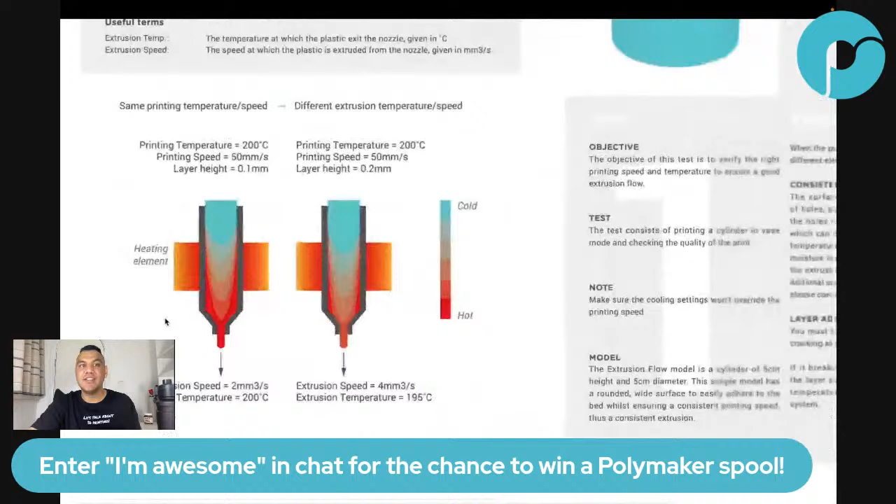This is - no, that's the - yeah, here. You see, there is a difference between printing temperature, which is defined as the heat block temperature, and the extrusion temperature, which is defined by the temperature of the filament coming out of the nozzle. And this is very important, and I wish people would use that vocabulary.

Why? Because sometimes to solve something, you have to increase the extrusion temperature. And yes, increasing the printing temperature can help, but there's many other things that can help - for example, lowering the speed. Lowering the speed will also increase the extrusion temperature. So there's a big difference between these two, and this is what he's saying. I really like that he said that, because it's very important, and not a lot of people do that.

Gonna have to rewatch this from the start. Now is Abdullah - yeah, is that confusing? I'm trying to dissect it properly. But I know you are in a wedding, right? So you have to listen to the bride at the same time as I'm talking, right?

Both curves will rise, so the gap will be smaller, blah blah blah. Sweetie HP, hello, what about heating?

The final thing you can do, which is the biggest thing, is to take this ambient temperature here and increase it, because that means the lower layer has less of a gap to close, and then this difference becomes smaller automatically. And you also start losing a lot less heat to the atmosphere because it's warmer. And the way you do this is by putting your printer inside an enclosure.

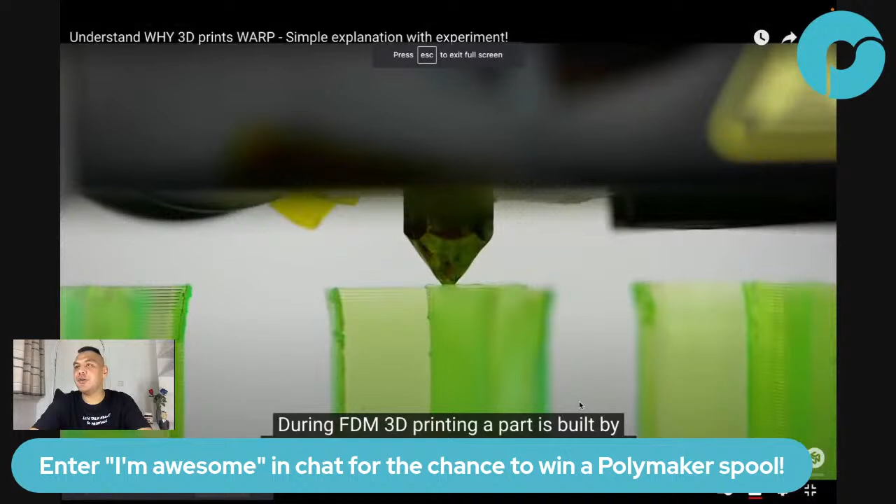Yeah, so I'm very happy that you are here, Igor. And if you're willing to do that, let's do it, let's do some tests, let's get things going about this theory.

Maybe he tested the shorts feature on YouTube because it's only 2 minutes. Yeah, I think that was way before that. But let's check Stefan's video - 'FDM 3D printing, a part is built by...'

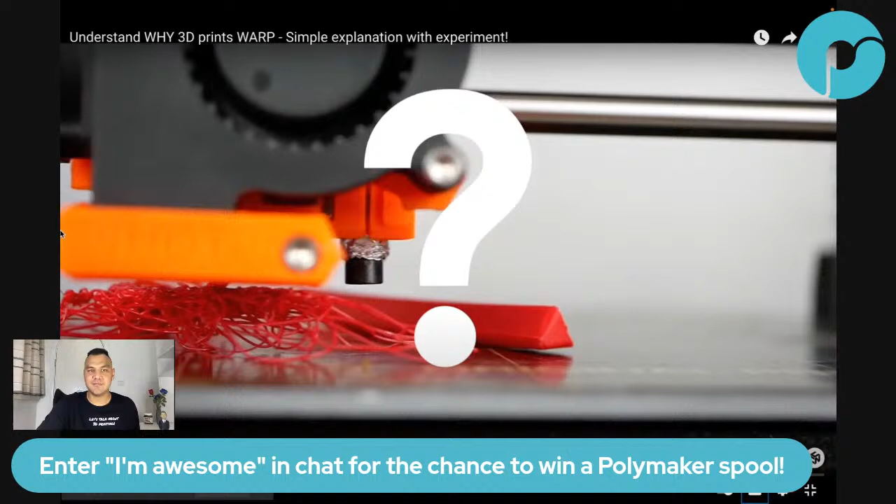Let me demonstrate this effect with a simple experiment. By the way, guys, I disagree with his explanation. I 100% agree with his demonstration. His demonstration is exactly what's happening. But his explanation is not what is happening, or at least in my opinion. When I saw this demonstration, I was like, whoa, that's the perfect way to show warping. But why are you saying this?

We all know that materials usually contract when they cool down. When I watched the video, I was shaking the tape and I was like, whoa, awesome. He's going to say it. He's going to challenge everyone. And then I hear, we all know that materials shrink when cooling down. And I was like, no.

Our 3D printing materials are mostly extruded at over 200 degrees Celsius and then cool down and solidify, which makes them shrink quite a bit. A piece of tape represents a layer that is printed. I simulate the material shrinkage by pre-stretching it and then sticking it to the table. Every subsequent layer will now pull on the lower layers. At some point, the connection to the table is not good enough anymore, and our simulated 3D printed part releases from the table and warps. There you have it. This is why 3D prints warp. How you can prevent this phenomenon is a topic for another video.

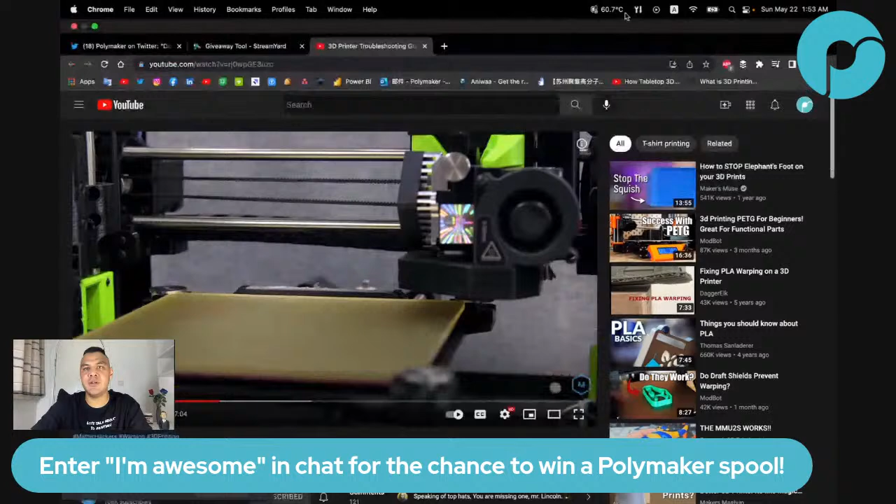Because I translated this from French, it should be viscoelasticity—something like this. Yeah, that's the one. Let me copy paste. Yeah, Santiago, that's the one. Sorry, my pronunciation is Frenchy, so sorry for that. Santiago, if you don't mind helping Joe if I miss some questions.

Thank you for helping. Proper Z offset. We're talking about warp just from filament squeezing out into itself. It's pushing that, can actually cause your first layer to warp just from the filament flaring out from the side. If your print is too low, it's going to cause warping, causing the filament to flare out from the sides.

This, I don't think so—we shouldn't mix up the warping definition. What he's talking about is over extrusion. If you're printing too close to the bed, you'll have over extrusion that goes to the side. But that has nothing to do with warping.

Squeezing out into itself, so it's pushing the previous pass up, which just reduces the layer adhesion in the beginning. And it's not pushing up, right? It's pushing sideways, but the accumulation is going to go up, right? Well, which is the same. Maybe I'm a little picky here, but it's not warping. I don't want people to think, oh, I'm printing too close, my part is warping. No—there's a sweet spot where your Z offset is at just the right height, where your part sticks well enough but it's not picking up.

You love the word viscoelasticity? Yeah, it makes it scientific.

Previous passes of extrusion. Now if you're printing with ABS or nylon specifically, those two are notoriously bad at warping—a lot more work, notoriously difficult to get printing, need a little bit of care to get them to work properly.

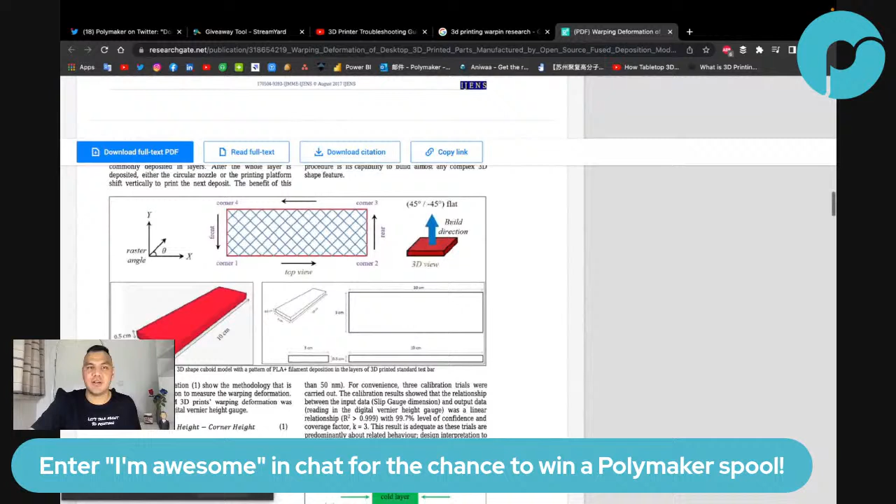Otherwise I look more crazy. But there is a paper that I think is this one—yeah, so look at this paper. I mean, you can read this paper, it doesn't explain, it just says exactly the same: when a material cools down, it shrinks, and then that's it. And then they do some kind of experiment.

But look at this—the hot layer expands, the cold layer shrinks. So they have a part that shrinks, that warps the other way. So even the research, they don't really—it's not because it's a research paper that it's going to be true, or that it's awesome just because it's a research paper. No, a research paper is meant to explain what they did and to draw the conclusion of what they did.

But that's your job to see if they explain well, if they ask the right question, if they test the right thing. That's your job. It's not that you receive that and that's it. That's the truth, right? So no, it doesn't work this way.

And if you go very quickly, then you will really realize that there's a lot of things that are missing. Let me share with you.

Interested in research in FDM? Yeah, I'm very interested, and we're actually doing our own research. There you go, I'm just sharing that, you can have a look. I didn't read it in very detail, I hate reading, but just in diagonal. By the way, that might be an explanation why I'm crazy, because I hate reading. So which means maybe I'm missing a lot.

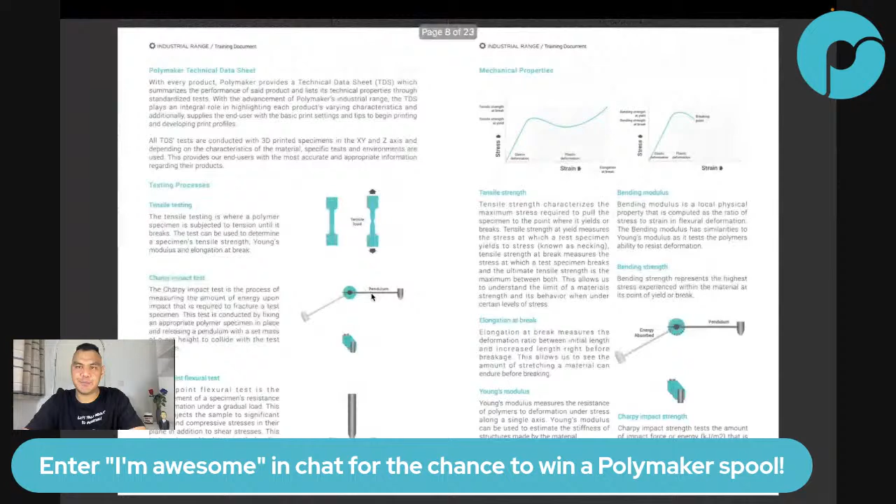But anyway, let me go into the explanation of what I think is warping. So I wrote this training document for the Polymaker people. There is a training process for all the Polymaker people, and that's how I explain all of this.

Okay guys, ready? It's happening. 3D Jeff, late? No, you're not late, you're exactly on time. You just missed the first part, the common knowledge, but now I'm into the big stuff, science is about to happen. I enjoyed the 2 hours. Oh, it's already 2 hours. Okay, great, you enjoy it. Ready everyone? I'm not ready, yes, waiting for it. 2 hours now, drop effect. Okay perfect, 2 hours later. You must use the discriminant to decide whether something is true or not. Discernment, whether you believe in it. Yes, I agree, signing off, have to go to bed. I don't know if it's the right time, Nathan, but have a good night.

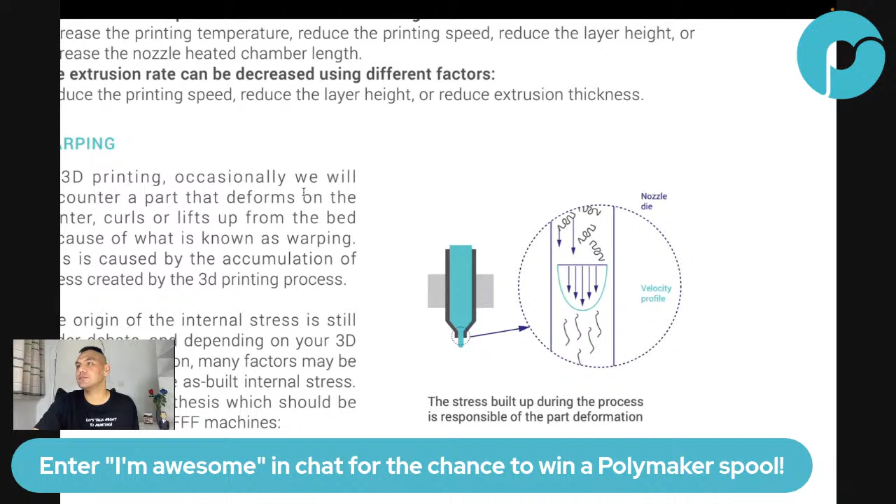Geoff Carroll, do you know about the contest? It's going to be basically the chapter from the book. Super slow, yes, if you already read the chapter there will be maybe a little bit more details, but that's basically it. Glad that you read the chapter. Let me know what you think.

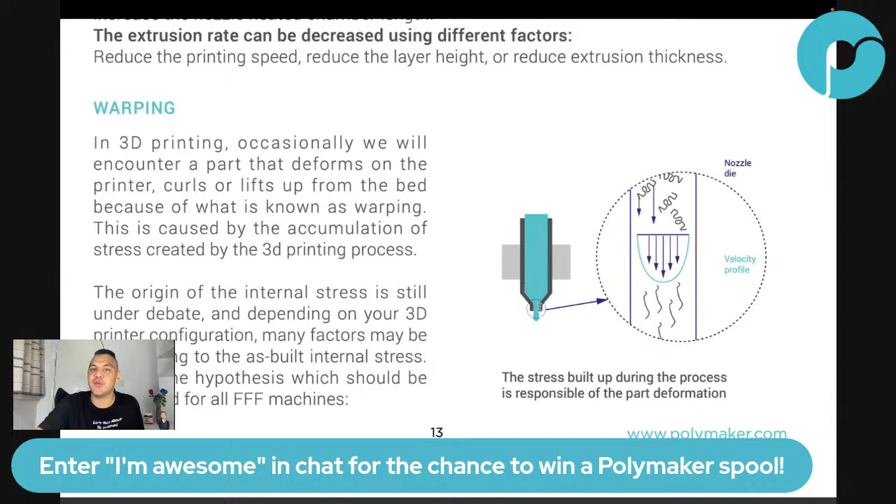So, in my opinion, the stress is actually coming from the viscoelasticity behavior of the polymer. What does that mean? It means that when you are pushing the filament through the die, you are forcing the material through it. It's like a rubber ball, the kind you throw and it bounces. You take that rubber ball and push it through a very small die. What happens after it goes out? In the die it's going to squish, and when it exits, boom, it gets back to its shape. So in polymers, the polymers are like spaghettis, and when you force them through the nozzle, they get stretched. Then you stick that to the layer below it, and that's where the stress comes from. It's exactly like the CNC Kitchen test: you have a tape, you stretch it, stick it somewhere, then you have another tape, stretch it, and put it somewhere. So the fact that the polymer is in a stretched state, it will want to go back to equilibrium, and that's where the stress comes from. So it has nothing to do with high temperature and then cooling down and the coefficient of thermal expansion.

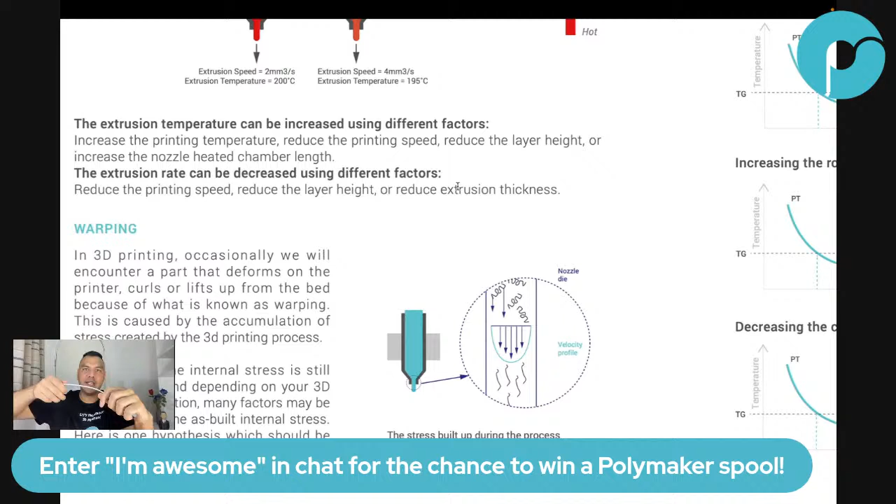I'll give you an example. If you have a rubber band, you stretch it, put it in water, and freeze the water, that's exactly what's happening. You are taking the polymer, and the polymer cools down, so it's frozen and cannot go back. And that's the stress. There's a lot of stress.

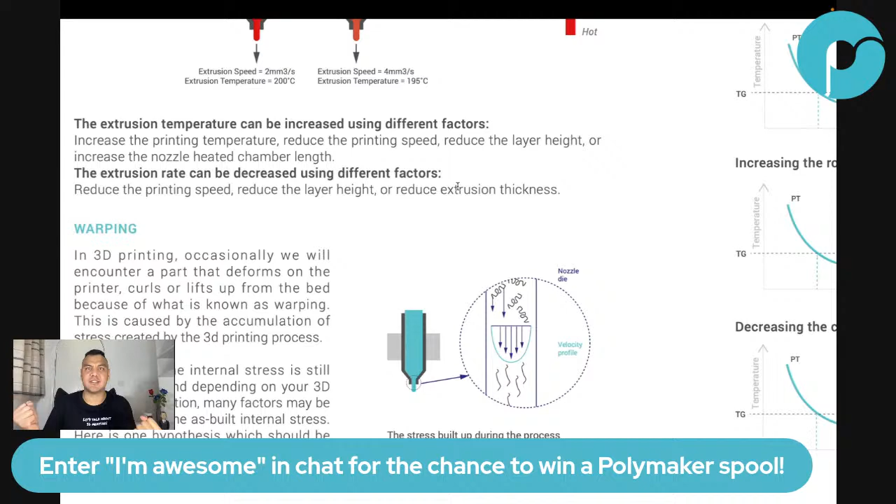Pallets like, okay, so the question I had, because I was saying the nozzle is stretching the filament. It's not enough for me. Why is the nozzle stretching the filament? I mean, it's a hole. If I have a ball like this and I'm putting it through the hole, it's still a ball. How come it's stretching the filament?

You need to challenge your own theory. And I was thinking, how in the world is the filament stretched by the nozzle? Okay, here's my explanation.

So it is really a combination of heat and extrusion. Is it both? In my opinion, the heat is negligible. The viscoelasticity behavior of the polymer is the major thing happening, in my thinking. I think the cooling is negligible compared to this.

So okay, here's the thing. Why? And you should ask me. It's like I demonstrated. Okay, experiment: I have a ball of filament. I put it through a hole. It's still a ball. Nicholas, why? Explain to me why the polymer would stretch.

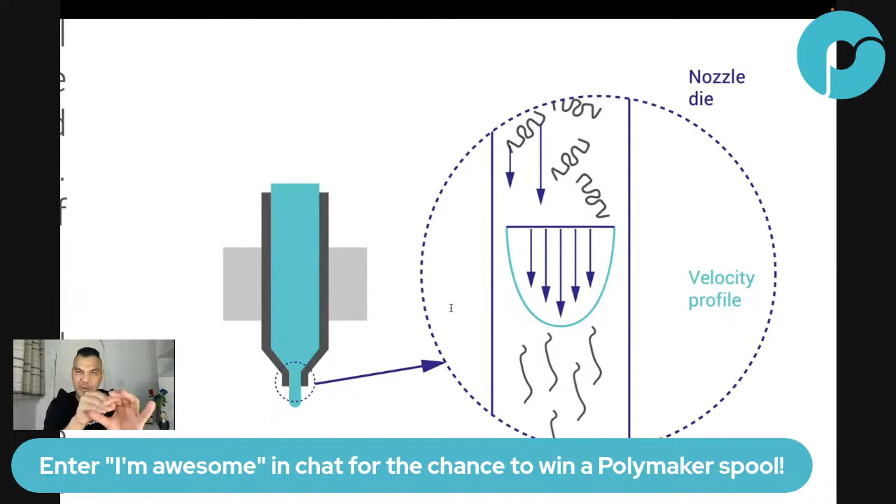When you have a flow of material or liquid or fluid through a pipe, you are going to create a velocity curve in that pipe, right? A velocity curve means the particles in the middle will go faster than the ones on the edge. The reason is the one on the edge has more interaction with the edge, so it will slow them down. And this one has interaction with this one, etc. So theoretically, the one at the edge is almost stopped, a very, very small layer that is completely stopped. And then you start to go faster and faster the closer you go to the middle, right?

So now think about it. If you have a wood stick or whatever in a flow, but the flow is going faster here than here, then it will slowly... let me start here. If here it goes faster than here, then it will slowly align, right? It will stretch itself. This one doesn't want to go as fast, this one wants to go fast, and then it stretches. Does that make sense?

Is it only me or is the stream breaking and buffering a lot? Maybe it's you, Abdullah, because usually when I have a problem, it shows me. But there's no problem here, so maybe it's on your side. If there's a problem on my side, it will show.

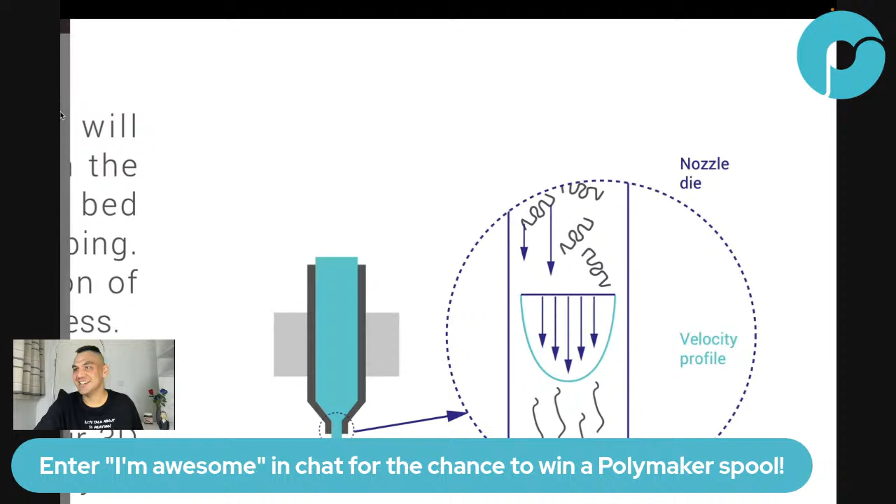Oh, I'm sweating so much. Actually it's getting hot here. It's getting hot, but I'm getting so excited. You guys cannot imagine how passionate I am about 3D printing topics. Definitely, if I understand anything, I will buy the most pricey filament in Polymaker. Well, hopefully you will. I think he's actually onto something.

Okay, so if there's no other question about why the filament is being stretched - how are you connecting the velocity of the polymer, the speed, to the stretch?

So the polymer is a long chain, right? This long chain will be somewhere in the flow, and each part of the chain will go at a different speed. The fact that you have a velocity curve means you will automatically align all the polymer, because one part will go faster than the other, and at the end of the day they will all align. I don't know if that was the question, but hopefully that answered it.

Polymaker, where are you at? Shanghai, China. It's 11 past 2 a.m. Getting hot, so you don't warp. Yeah, I'm definitely in a heated chamber, so I'm not going to warp.

Would it also be true that the more liquefied and hotter the filament is as it passes through the nozzle, the less likely it is to warp? That is a bit counterintuitive, but that is correct. So why?

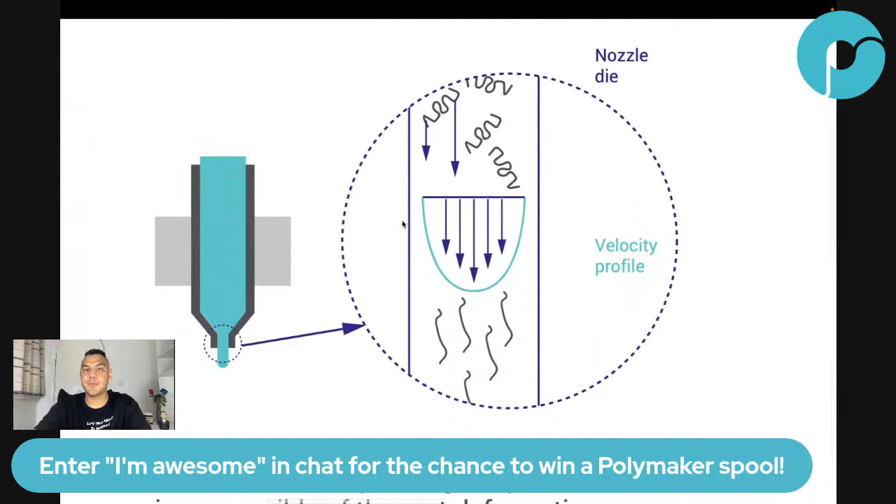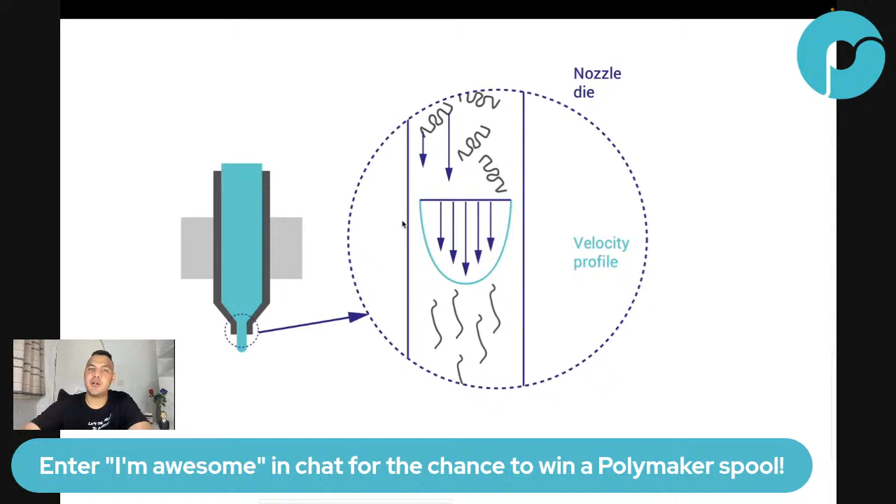How can you make sure the polymer doesn't stretch? Well, you have to flatten that velocity curve, right? Recently with COVID and stuff, we've become very good at flattening the curve. So what are the different ways of flattening this curve? Way number one: you can have a very low viscosity material go through. If it's very low viscosity, then the curve is going to flatten, because there won't be much speed variation in the polymer.

You can think about it this way: if you put honey through the nozzle, the middle is going to go fast, because the edge transfers the slow speed to the middle very easily with honey, since it has very high viscosity. But if it's water, even if the edge is very slow, it has high difficulty transferring that brake to the middle. You get what I mean? So you have a more homogeneous speed, and if you have homogeneous speed, you're less likely to stretch that polymer - at least in that theory. Yes, the speed-to-stress relationship.

A heated chamber gives the extruded polymer time to slowly release the stress before it solidifies. Yeah, we're coming to that. Oh, I think I'm understanding what you're saying now. Okay, great.

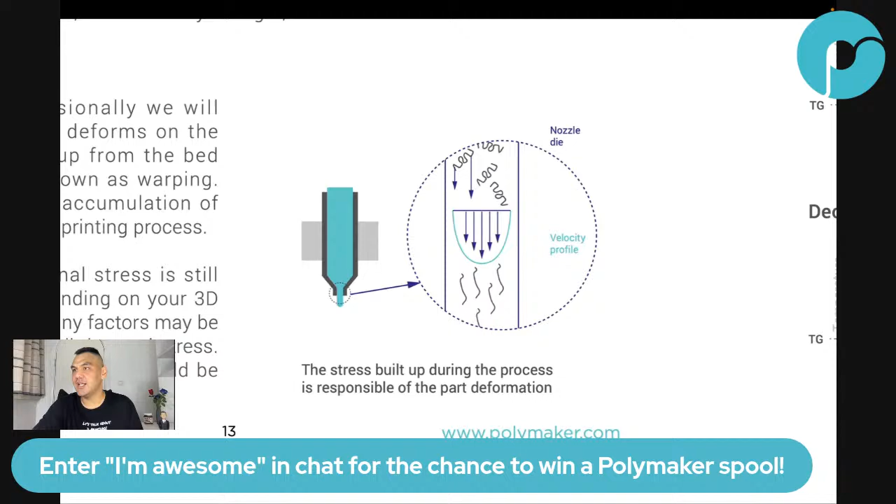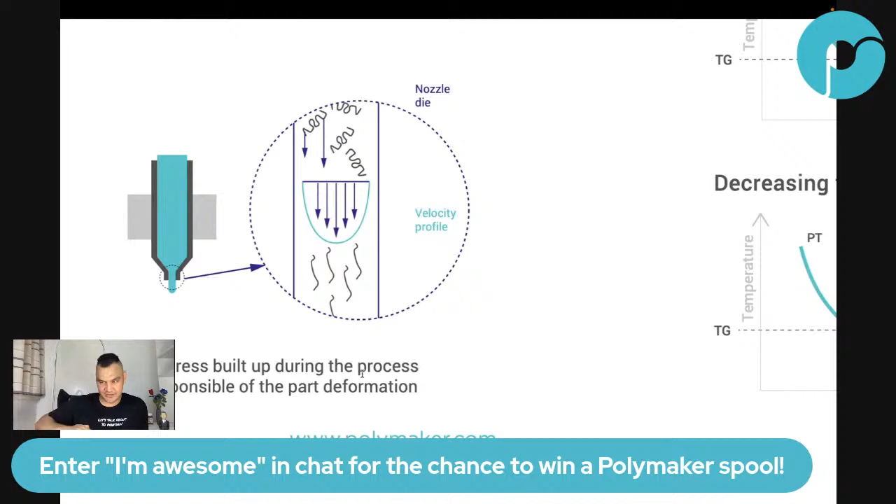Okay, so if it's clear for everyone, what's happening after that? After that, it's laminar because it's round, consistent. Maybe, I mean, I don't like to talk so much about things I don't have experience nor theoretical knowledge on. I have my academic background, I'm from software engineering, so my mechanical and physics classes were very low level.

Okay, so what's happening now? You are printing your part with stress. Right after you extrude, you have this stretched polymer, right? Well, the polymer will try to release the stress and start to come back, but it can only do that if it can flow, right?

So to test this theoretically, a thicker nozzle and thicker layers should warp less. A thicker nozzle, I'm not saying it should warp less, I'm saying it will have less stress, but you have to have the whole picture. There might be other parts of the picture that need to be taken into consideration. But yes, what I'm saying is a bigger nozzle will induce less stress in the polymer. Thicker layer should warp less.

No, thicker layer in that particular case means you are going to extrude faster, so the velocity curve is going to be sharper because of the shear stress you're creating, right? So thicker nozzle, yes. Thicker layer, currently in our current explanation, no, it doesn't make sense for this one.

Later on, yes. Polymer melts have a high kinematic viscosity, so you need very high speed to achieve turbulent flow. Maybe. So, dropping that effect, you are confirming that it is indeed a laminar flow inside the nozzle. Okay, thank you for confirming.

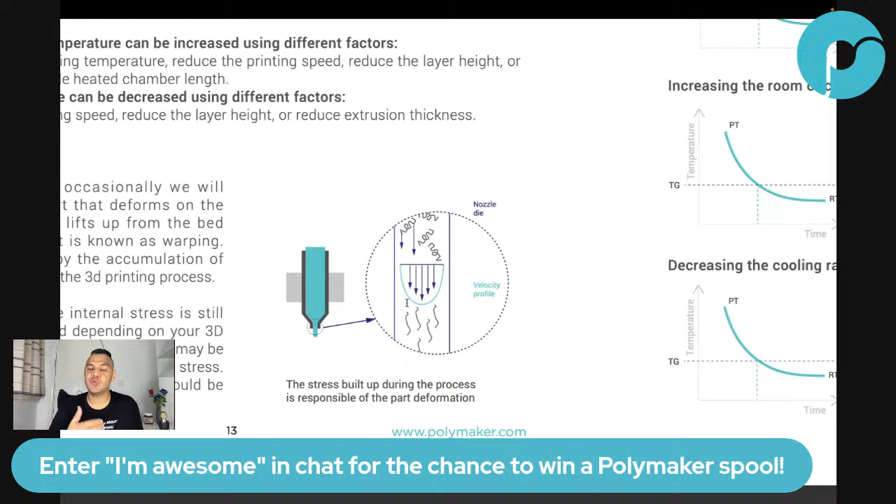Oh, okay, yeah, bigger nozzle, yes, and slower speed, yes. Definitely. And higher temperature so that your viscosity is even lower. So all of this, in my explanation, should reduce stress. I'm not talking about warping yet, we still have some other things to talk about, but yes, it will reduce stress.

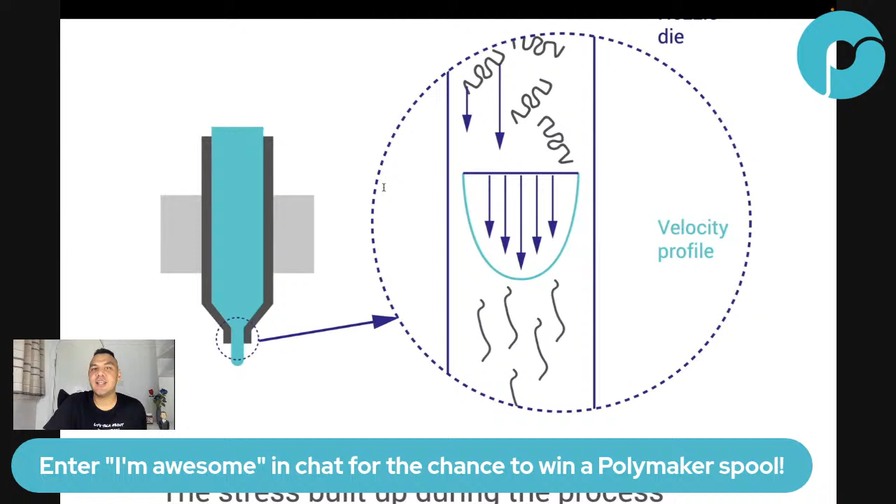Sorry, I don't understand - it's a hypothesis, still needs to be tested. A theory means it's been tested. Well, we tested it. Now either you believe it and that's it, or you test it yourself, and my suggestion is that you test it. So if you want, call it a hypothesis for you; for me, it's a theory, for me it's true - everything I've done goes into that logic. There won't be anything that confirms it 100% except looking at everything under a microscope. You can only do a bunch of tests that go in that direction. If you think a theory is something that's 100% confirmed, it's never going to be a theory, because material science for polymers is at the very beginning.

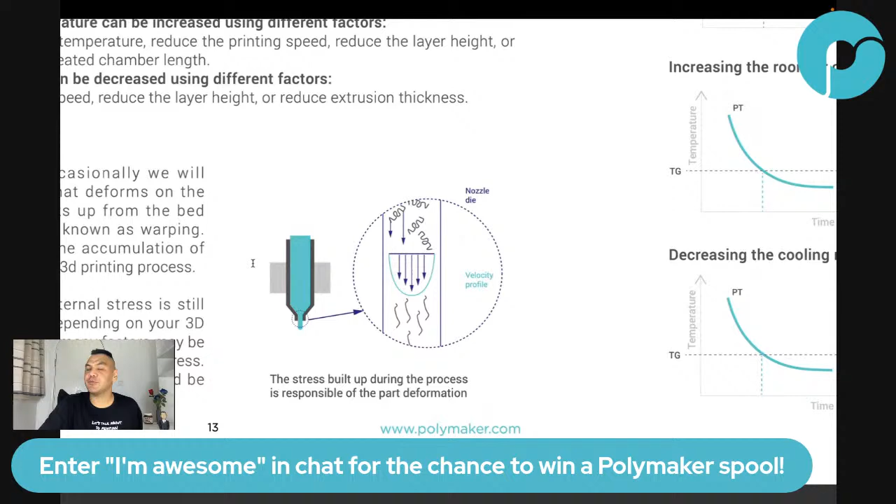So exactly, we all need to test it. I'm trying to determine what the test should be. Let me continue and then you can think about some tests - there are already a lot of ideas. What I'm saying is all of this should reduce stress. Now we need to think about which factor is bigger than the other. Is a bigger nozzle going to reduce stress more than just printing at a higher temperature? Will coating the nozzle inside be better than using a bigger nozzle? You get what I mean?

Sorry, comment with link is not appearing. Search for the video - Prusa should make this innovation because nobody else really can. Flat filament, not round.

Is he talking about warping inside, or just presenting an idea of flat filament? Micro Swiss markets some steel nozzles with a low friction coating. Yes, maybe you can try this - try one with low friction coating and one with a regular one and see how it does.

Some people think you can print ABS in open air, but you'll have layer separation and lifting. So I only print ABS in a pre-warmed enclosure, but rarely print ABS anymore.

Would a bigger nozzle cause a vacuum effect? A vacuum effect with a bigger nozzle? Sorry, I don't understand.

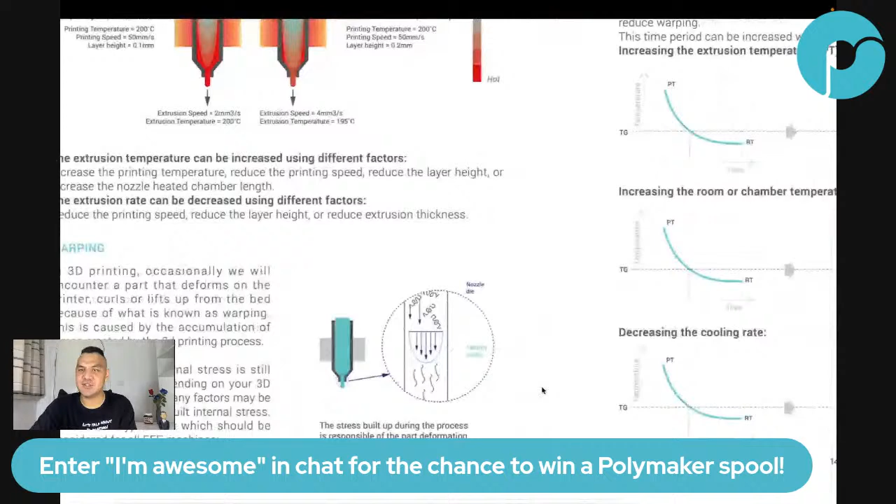Okay, so after it's printed, your goal is to release that stress, right? Because let's say you print, and then cool down very quickly - then basically 100% of the stress is going to stay in the filament, because the only way it can release the stress is if the filament is above TG, above the glass transition temperature, because that's where the filament can flow, where it has enough energy and vibration. Above TG is the temperature at which it has enough energy to flow, to move, without affecting the macroscopic shape.

So as long as it's above TG, it will slowly come back. As soon as it goes below TG, it will freeze completely. Okay, it will still move very, very slowly, but that's different. That's a different thing. Do you get it?

So that means if you print ABS and use the cooling fan to cool it very quickly, all the stress is going to be included inside, and then all the layers are going to be pushing—first layer pushing the second layer, third layer, etc. We all agree the accumulation will make it warp. We can go more into detail on why these shrinkages accumulate and why they go into corners or specific parts, but maybe we can do that later, otherwise it's going to be like a 12 hour video about warping. But that's one thing you need to have.

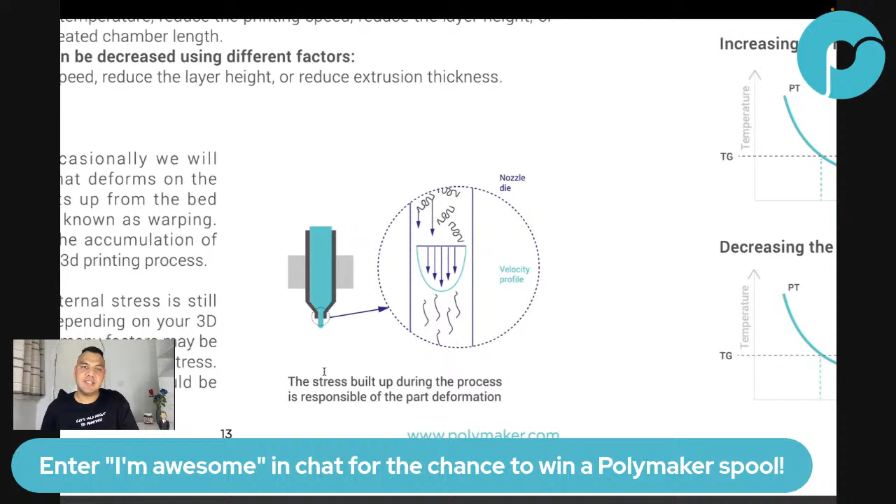Does this mean shorter polymer chains warp less? I've never thought about this, but let me think. Shorter polymer chain... yeah, I don't know. Maybe, I would need to think about this more.

Inside the nozzle there is higher pressure, that's why filament comes out. Think about a bottle of water—if you have a bigger hole, you will have water flow down and get sucked up because of the air. Yeah, you don't have this problem because it's pressure based, it only goes one way. It's not like a bottle.

Okay, so now you understand. What do you need to do to prevent warping? Release that stress. Release that stress.

How to release that stress? Having the filament above TG, having the layer or the part that you printed above TG for as long as it is necessary for the whole stress to release. That's very, very important. That's the fundamental of the second part, which is how are you going to solve warping? How do you solve warping? You make sure the polymer releases the stress before it goes below TG. Is that understood? Because the whole thing after that is this.

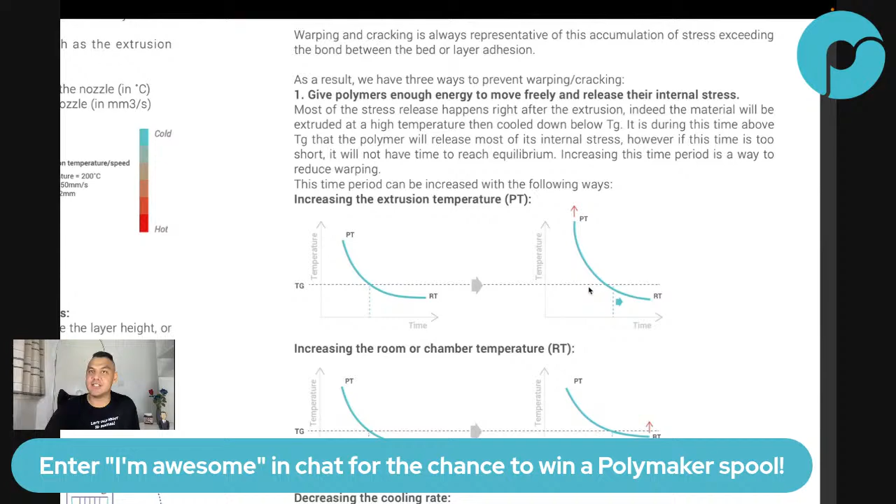How can we get the polymer above TG for as long as we can? The whole thing after is about this.

In 3D printing it looks like Teflon starts to break down, blah blah blah. A bot storm just hit there.

Oh sorry, Builder's Mark asked: How does the stress release? What do you mean, how? It's like a rubber band—if you stretch the rubber band, then it's coming back, because it's a stress state.

It's like a ball inside a curve, right? If you put the ball here, you stress it, then it will automatically come back—it will come back here. So the polymer is stretched, and then it comes back, because it can move, it's above TG, so it goes back to equilibrium.

Does that answer the question? Is there a few of you that can confirm so far you're still with me? Above TG the polymer can still move. Yes, it can also move below TG, but with a different behavior. Okay, you're still following me.

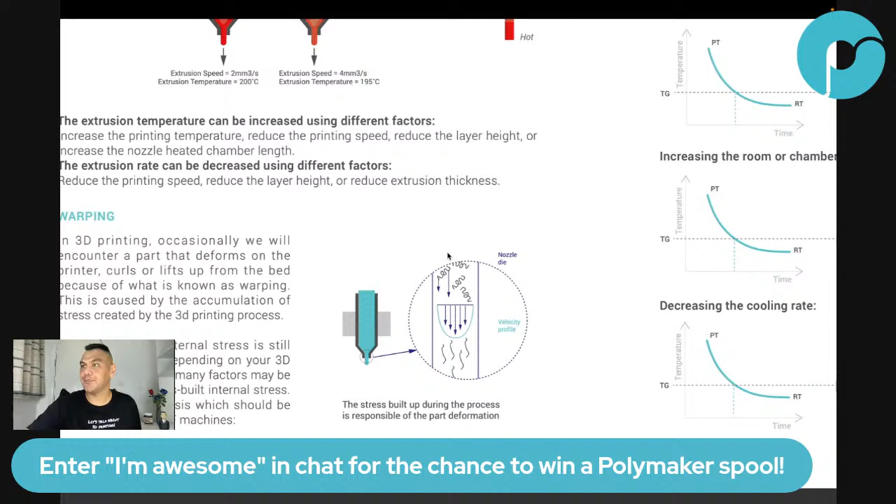Oh, we have 61 people. Amazing, 61 people discovering a new way of seeing warping by cooling down and hardening.

No, so simply speaking—when it's cooled down, then it cannot move anymore, and that's the problem because it will induce the stress.

We are a bad class. No, you're a pretty good one. I'm so happy that people are willing to listen to a different theory or hypothesis. I'm very, very happy, because honestly we were around 50 people at the beginning, and I was thinking after I talk about this everyone would be like, don't want to hear about this, I just want to talk about how to solve my warping, I don't care about where warping comes from. But we still have 60 people. This is just amazing, and you guys are very active, asking questions, challenging—that's amazing.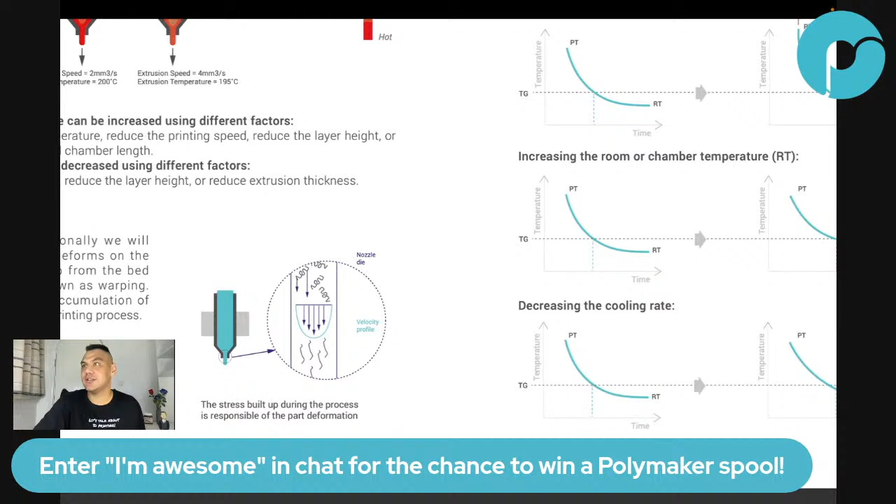Okay, so let's continue then. How to keep that filament that you extruded above TG.

Man, I really hope this is available for rewatching. Are you recording this? Releasing it in a slightly edited form and multi-part series would be great. Yeah, sorry, super slow, so it's recording, yes. Hopefully it will be rewatched, but I don't think I will have time to edit.

I mean, I'm a business manager at Polymaker. I'm not doing this because... that's my duty. I have a theory that I think is right, and I think it's right to say it out loud. I'm not in my working hours here, it's literally the night.

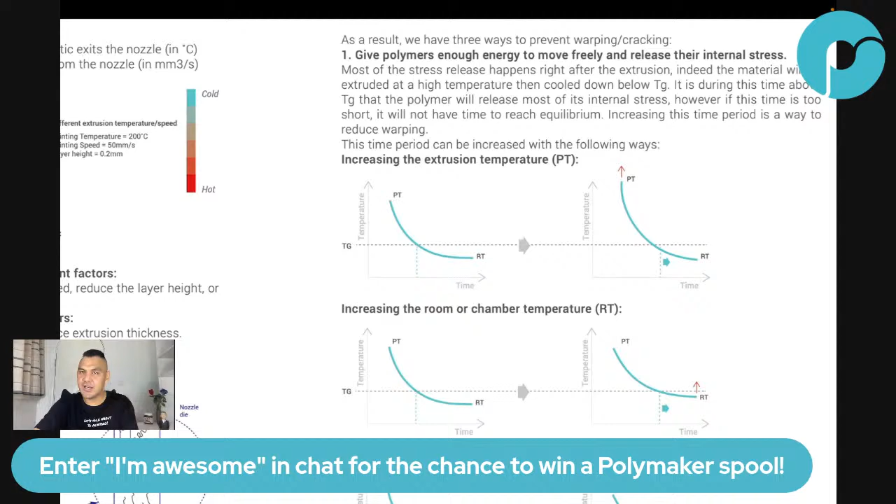So solving the issue, we want to release the rubber band stress. To be honest, right now you can already solve it. As long as you know what's happening, you know you have to release that stress. You know you have to maintain the filament above TG to release that stress. Then that's it.

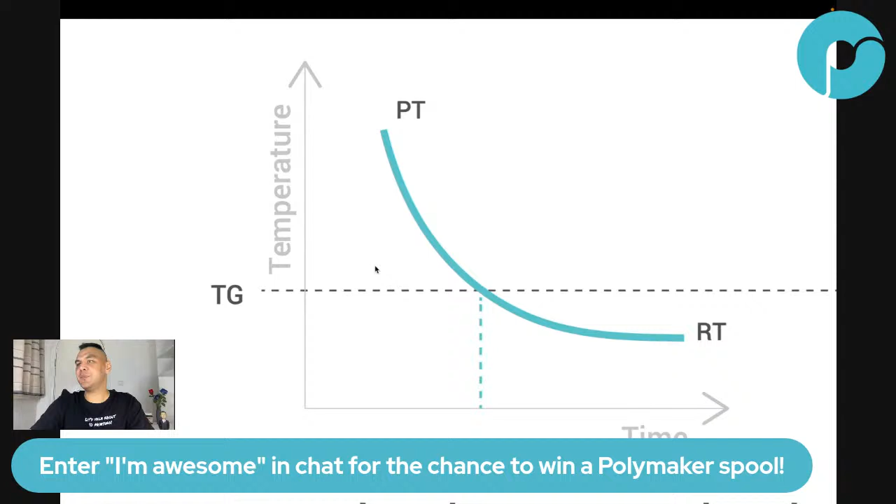Okay, so this is this - you have the TG that is here, right? So the time you have here, from here to here, you can see my mouse, right? So this is the time that we're looking at - relaxation time. So this time, we need it to be long enough for the polymer to release the stress.

So the question you are going to ask me is, how long? How long do I need? Do I need 1 second, 1 microsecond, 1 femtosecond? Do I need 1 minute?

So this question, unfortunately, I don't have a clear answer to. I do have some data that I cannot completely share at the moment, but let's say maybe it would be around... I have no idea, but it's not like 1 minute. Maybe 0.4 seconds, 0.3 seconds or something like this. I don't want to say the wrong thing, but that's the time.

If your part, let's go like this. If your part is warping, then allow it more time. And if your part is not warping, it means there is enough time, okay?

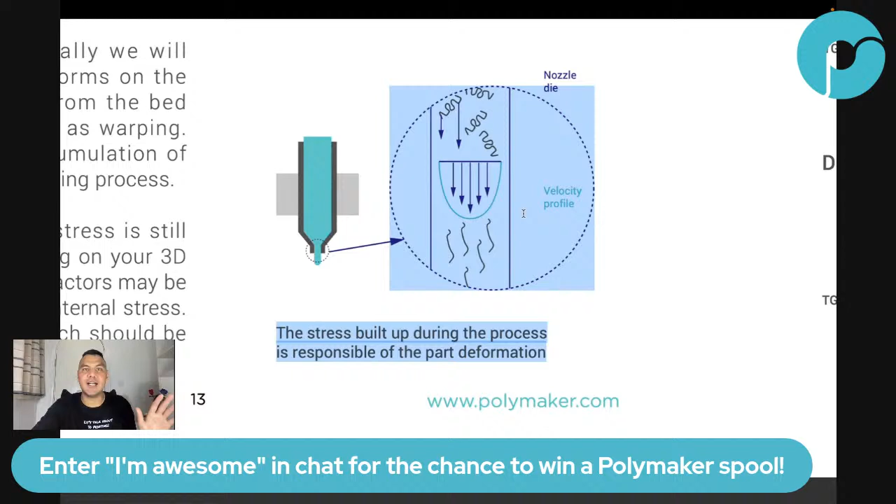Sorry, every time I'm looking at the chat when I'm talking, but I should look at the camera. So before, all the solutions we had were about not stressing the polymer, or stressing it the minimum possible. Now, the solution we're talking about is: okay, we have that stress, we minimize it as much as we can with some solution. Now, that stress that is left, how can I get rid of it?

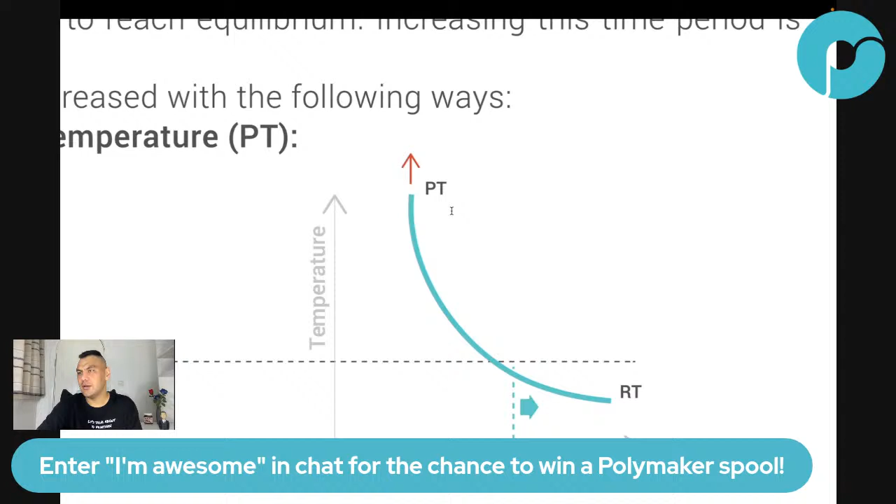So printing faster should make it warp less in theory. Why? Printing faster... yeah, you should give me a little bit of connection, right? At least connect it to how it allows the filament to stay above TG for longer.

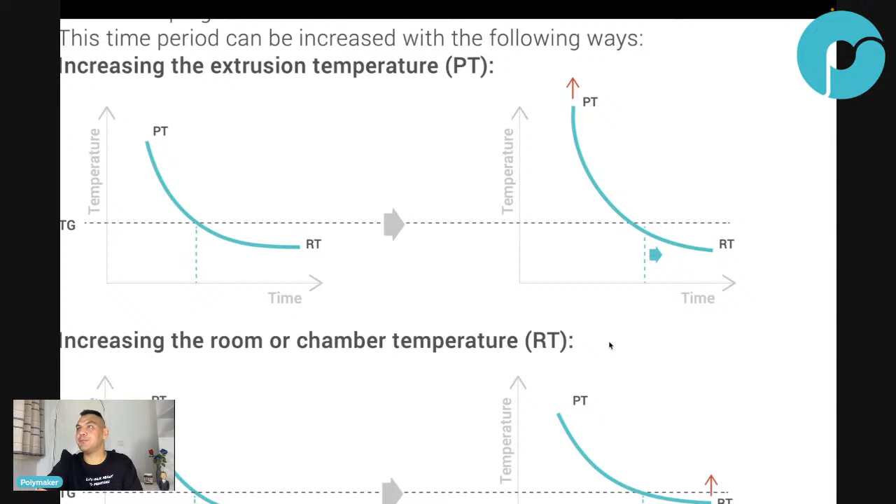My theory around warping. Printing slower would mean more consistent temperature. Yeah, so if you guys have some solution, try to link it so that I can understand. If you ask me, then give me your logic. You know, now we are trying to increase the time at which the filament stays above TG, right? So if printing faster helps with that, then yes, it will. But just give me the connection point.

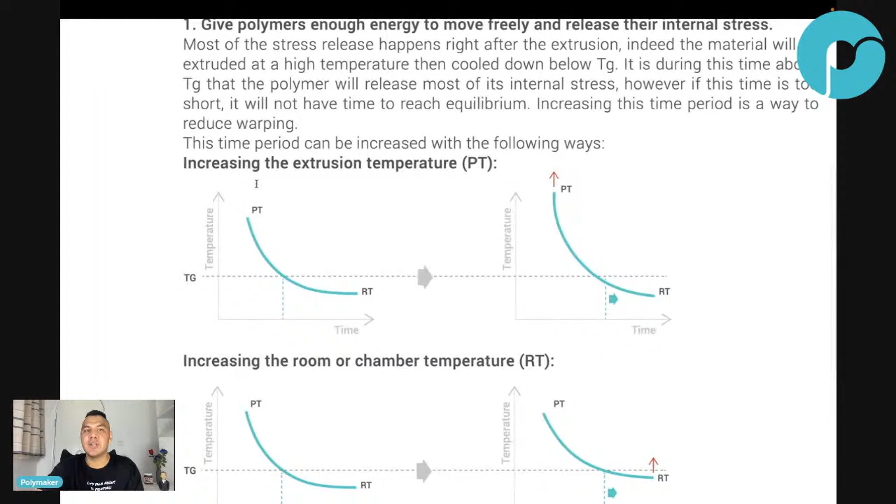So the next one is room temperature. If you increase the room temperature from here to here, then you will also increase the time. If you decrease the cooling rate, which means you don't use a fan, it's the same, you increase the time. So whatever you do, increase the printing temperature, increase the room temperature, decrease the cooling rate, you are increasing the time at which the polymer stays above TG, which means you are preventing stress from accumulating, which means you are solving your warping issue.

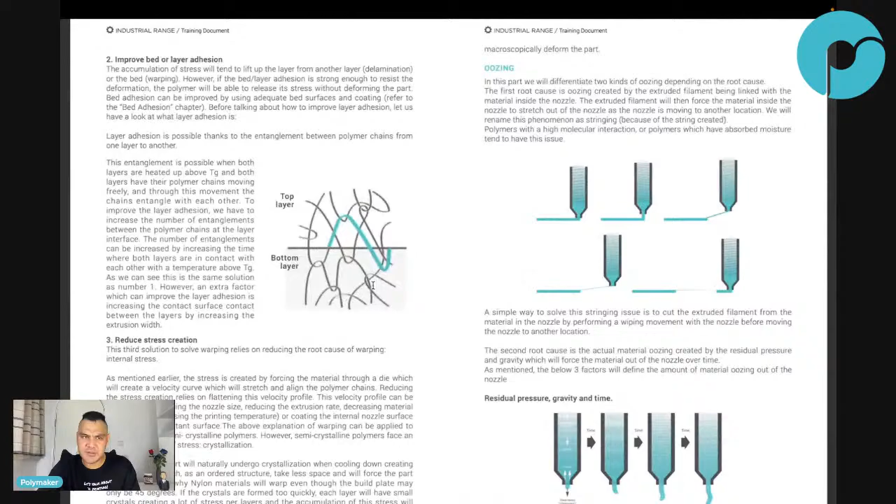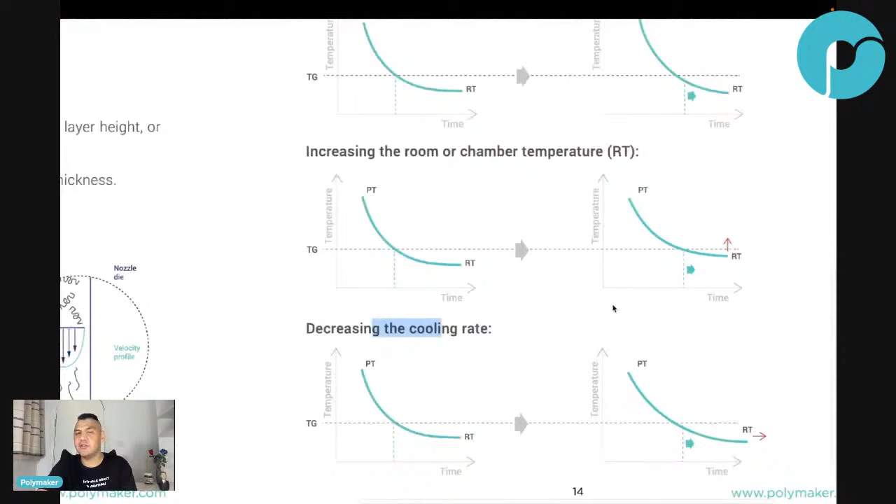Yeah, all of this is about some other topic. By the way, if you guys like this kind of going deep into what's happening, I do have some other stuff about oozing, like exactly what's oozing, what's stringing, what's the difference between oozing and stringing, how does that happen, what forces are involved, how can you solve this scientifically, same for layer adhesion, blah blah blah. So if you are interested in this, let me know. I can do this every day. So far so good, right?

Faster printing will put more heat into the part, not letting the stress area drop to ambient as quickly, letting the part stress easier. But not really, because if what you mean is you print faster, right, it puts more heat in the part -- why would printing faster put more heat in the part? Why not letting the stress area drop to ambient temperature as quickly? I don't understand, I don't think it makes sense to me, or at least the way it's explained.

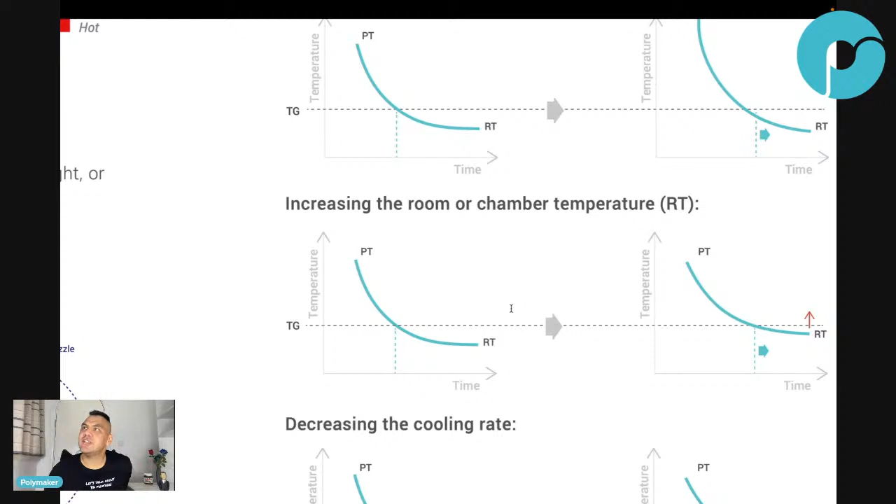I mean, I know how frustrating it is to explain something by message, right? It's easier vocally, but as it is explained, no, I don't think so, or I still cannot make the link. Yeah, I was thinking that you need to print faster to get more heat, but I still am stuck in understanding how the rubber band is able to release at higher temperature.

Oh, okay, I think I get you. So what you're saying is you want to understand exactly why when you have a rubber band, you stretch it like this and then it comes back. So that's what you want to understand. Why a rubber band, if you stretch, comes back.

Maybe people are like, yeah but, you know, like the video I showed you at the beginning, that's what science does - if you stretch, then you come back. So that's what you want to answer, right? So let me explain, I've never thought about this, but I will try to use logic.

So the polymers inside are going to stretch. And then, let me think. Polymers are chains, right, and when you have a molecule, there are angles in the molecule. You have one molecule like a carbon, and then there is a hydrogen, and then another hydrogen, and the fact that they repulse each other or attract each other will make them at a certain angle, and will make them in a certain shape.

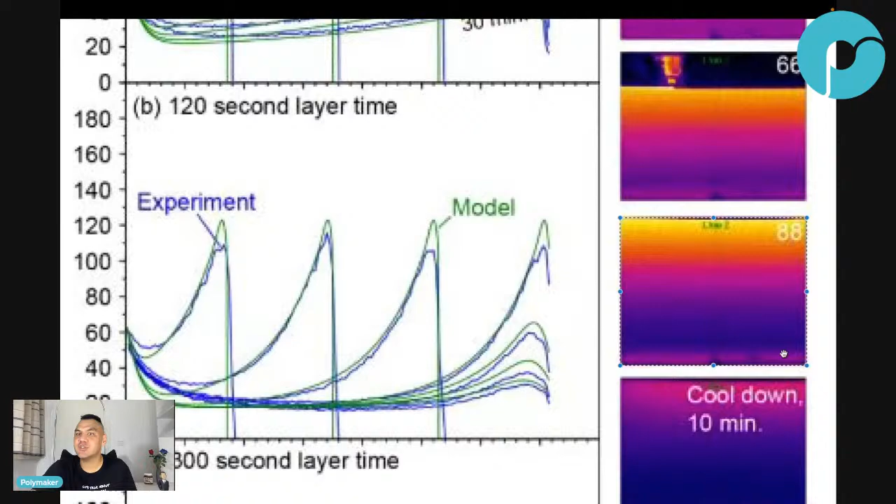This one - so if you print fast, it's basically this. You can keep many layers hot, right? But then can you imagine here the temperature gradient? This is crazy. Here it's going to warp a lot because of the temperature gradient. But no.

Depends on how fast. If you print slow, the nozzle stays near longer. Yeah, I'm printing ABS, blah blah.

I have to leave, thank you for the discussion. Yes, thank you Jeff, thank you for the really great question. I like the way you are - you really want to understand every single part of it, and that's the way to do it.

But the next layer, keep the previous layers warm faster. Yes, the part is basically the same temperature. Blah blah, sorry it's jumping again. How big are the parts? Okay, blah blah blah.

The thermal expansion shrinkage - there are some good videos about welding showing different strategies. If you stitch weld two pieces together from side to the other, there's a lot of movement. Yeah, sorry, I don't understand. But yeah, I've seen, like if you have two different metals, you stick them together and they have different coefficients of thermal expansion, and then you heat up the room, and it's going to take a certain shape. It's going to warp because one is going to expand less than the other.

Blah blah blah, isn't warping because it cools too fast? Yes, yeah, it cools too fast. So the stretching that you have from the nozzle is frozen. It doesn't release because it cooled too fast.

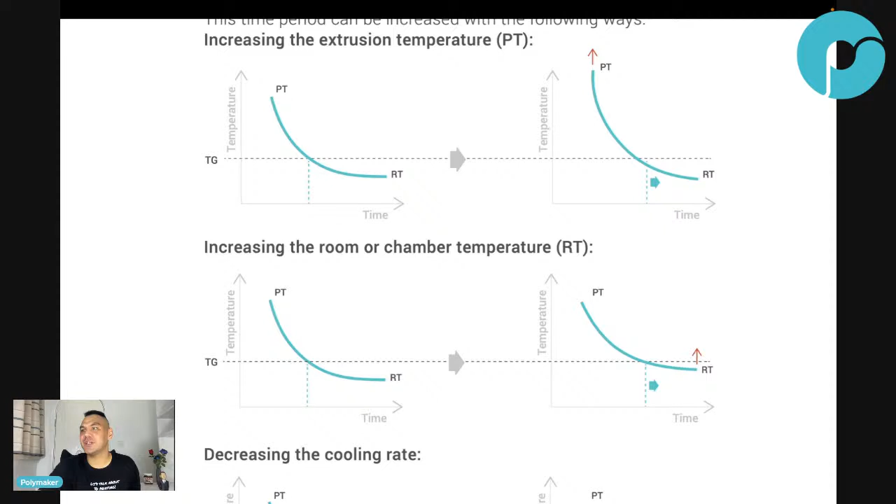Okay guys, so that was for the amorphous material. There are 3 ways to solve warping. One way: give polymers enough energy to move freely and release their internal stress. That's number 1 out of 3.

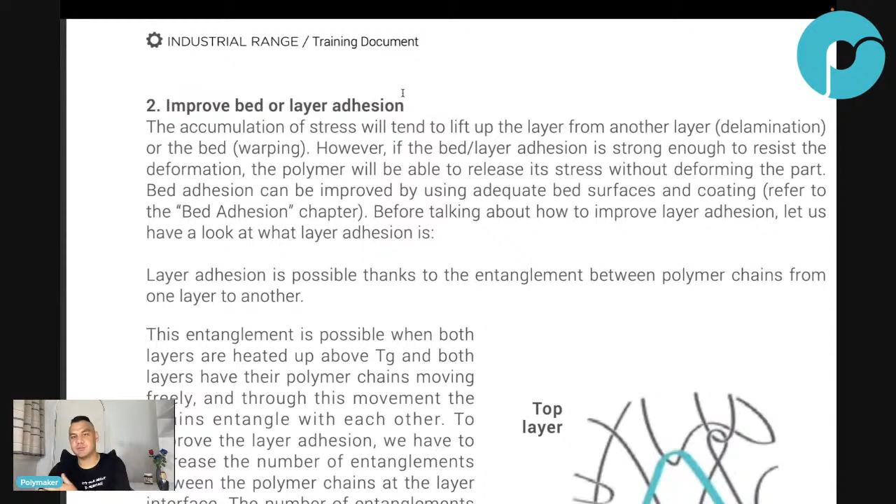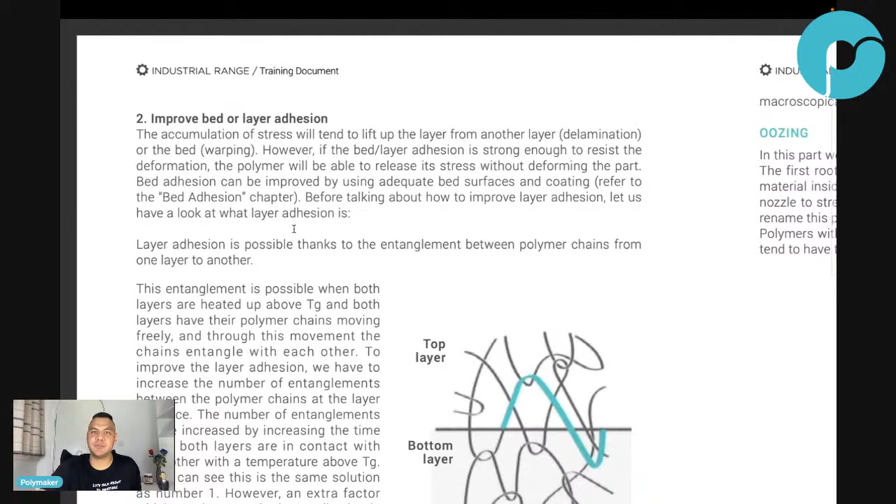Second one: improve bed or layer adhesion. That's what everyone does, blah blah blah, so I'm not going to go into that - I mean, I explain things differently than the YouTube videos explain it. But this is about improving bed and layer adhesion, and I think there's a lot of things out there. Let me know if you want me to explain it in my way.

But yeah, that's it, and then reduce stress creation. So that's the 3 things, and we just did the first one: reduce stress creation. So, to solve warping, reduce stress creation - the nozzle stuff, reduce that.

Second, release the stress. And if you cannot, or let's say you release as much stress as you can and you still have some left, then the next step is to try to find ways to combat that so it stays in place.

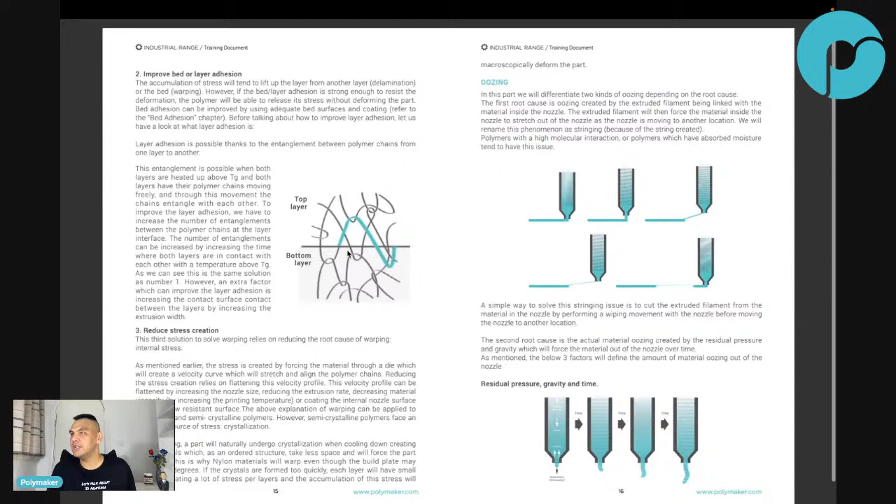And then you can anneal the part afterward. Okay, so now the last line on crystallization. The welding thing - each successive weld captures the movement from the previous thermal expansion, negative effects build upon themselves, each successive part - that's what I was relating to 3D printing.

Oh okay, so you mean when you weld many things together, potentially as a possible argument for thermal expansion impact vs elasticity, but the viscosity stresses are convincing. Okay yeah, I will look into that. So are you talking about metal printing, like metal welding printing? Because we could look into that.

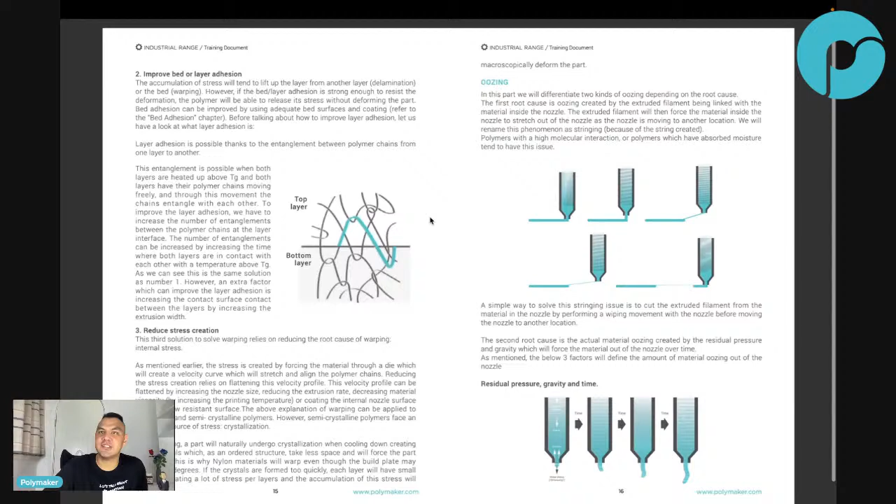Because the thermal expansion of plastic is much higher than metal, right? So we can see if they have a warping problem in the metal industry - not SLM, not selective laser melting, I'm talking about welding printing, where they print and then they weld.

Okay, last line: crystallization. What we talked about was amorphous polymers, okay? For semi-crystalline, what is happening is - so do you think the flow percentage affects warping?

Higher extrusion multiplier means more filament, which means more stress. Well, higher extrusion multiplier means the flow is higher, so you're increasing stress creation because you're making that curve - you know, the velocity curve - sharper because you're extruding faster. So if you want to compensate for extruding faster with all this shear stress, you have to increase your temperature to lower the viscosity, and then you flatten that curve again. You see how everything fits together?

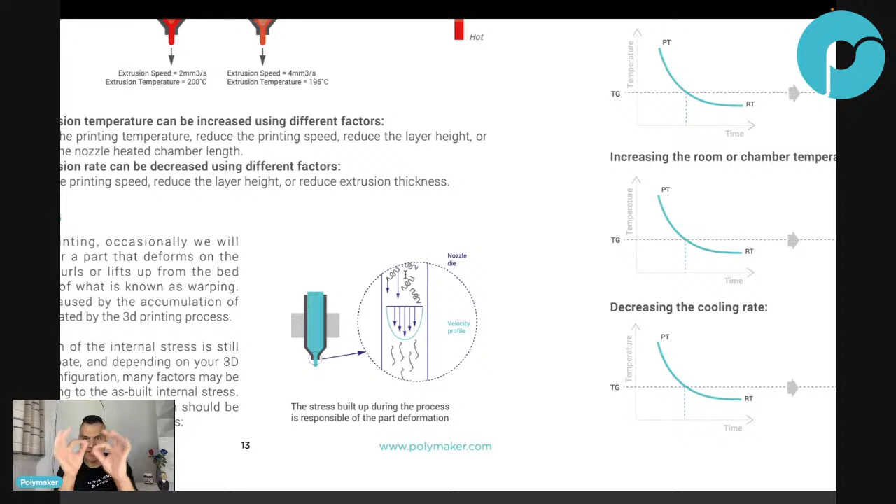Every single thing is explainable, and everything goes ding, ding, ding, ding, right? This is what I love about this - everything is explained.

But not enough flow, and there's not enough bonding - not flow, speed, extrusion amount. Sorry, I don't understand, I'm way late. Yeah, we already explained most of it.

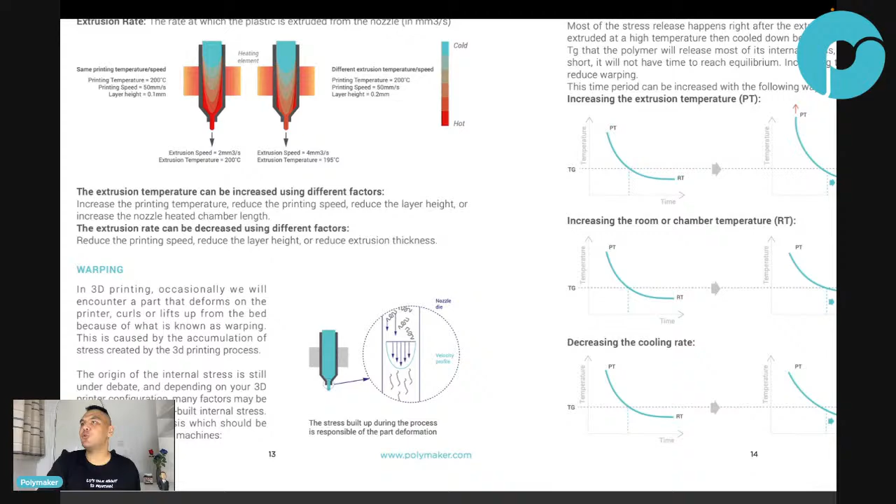Now we are going to explain the semi-crystalline additional problem with warping. Just something with a lot of exposure regarding thermal expansion - I can't afford metal printing. Okay, so the additional thing for semi-crystalline is over extrusion, under extrusion.

So do you think the flow percentage affects warping? Higher extrusion multiplier means more filament, which means more stress - over extrusion, under extrusion. Well, under extrusion will have less stress than over extrusion. Okay, so for semi-crystalline, what's happening is the crystallization rate.

So a quick explanation about crystallization - what is crystallization?

By the way, you guys are always asking for a melting temperature of PLA, melting temperature of PC, melting temperature of ABS. One thing I want to clarify: there is no melting temperature for amorphous material. Melting temperature is defined by the temperature at which the crystal will melt. So amorphous material doesn't have crystal, so there's no melting temperature.

Amorphous material has a TG, the glass transition temperature. Above TG is going to be a rubber state, and then it will slowly get less and less viscous. So the question you should ask is, what's the temperature at which the viscosity is low enough for me to print? That's theoretically what you should ask, not the melting temperature.

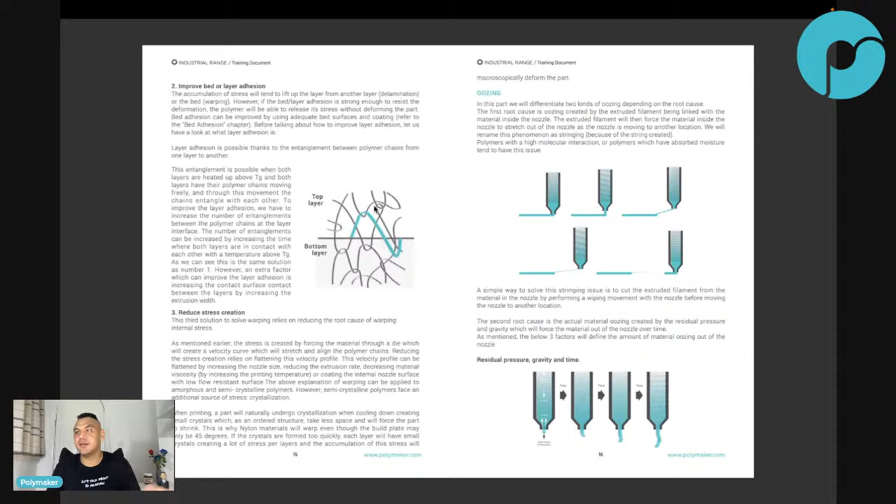But anyway, just ask for the printing temperature. But you get what I mean? There is no melting temperature, because the melting temperature is the temperature at which the crystals melt. I don't know that it will have any more impact.

There's changing E-step in firmware. Those are above just rubber stage. Remember, E-step is in hardware calibration, flow is in software. Every filament has its own.

Oh yeah, Zombie Hedgehog, I still need you to give me a class on that. And maybe after I understand that better, then maybe I can answer your question. But I might need your teaching first.

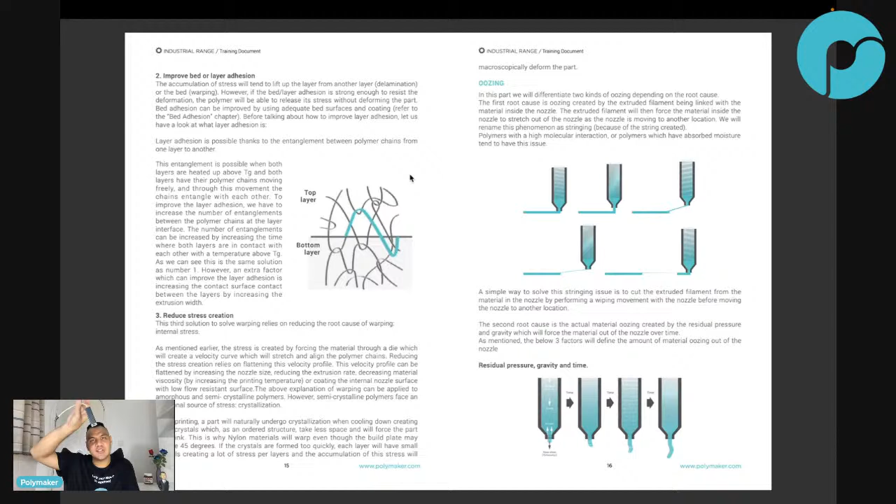Okay, so crystallization is what? You have the polymer, semi-crystalline, let's say nylon 6, and then you are heating it up. You heat it up, you heat it up, you heat it up. There will be a time where the filament suddenly can flow easily. So it means people can take the part and deform it because the polymer can flow. That's TG - above TG, a little bit rubber.

And then you continue, higher temperature. Think about it: you are giving energy to the polymer as you increase the temperature, right? And then it can move, it can vibrate, it can move a little bit. And then it gives more energy, then it can move more, it can move more. And then suddenly you give it so much energy that it can start to do things it couldn't do before.

And for semi-crystalline, that thing is crystallization. So you give it so much energy that it's like, oh, now I can move so much, I can see my tail, and then let me stick to my tail. And then another guy comes and sticks. And then they start to align properly because they have enough movement. Okay, now you have reached TC, the crystallization temperature.

Now, crystallization temperature doesn't mean the temperature at which the polymer crystallizes. It's not like you arrive at that temperature and then everything crystallizes. No, the crystallization temperature is the temperature at which the polymer can crystallize the fastest. It's like a kinetic thing. So at that temperature, this is where all the polymer crystallizes the fastest way. So if you leave it at TC for long enough, then they will all crystallize.

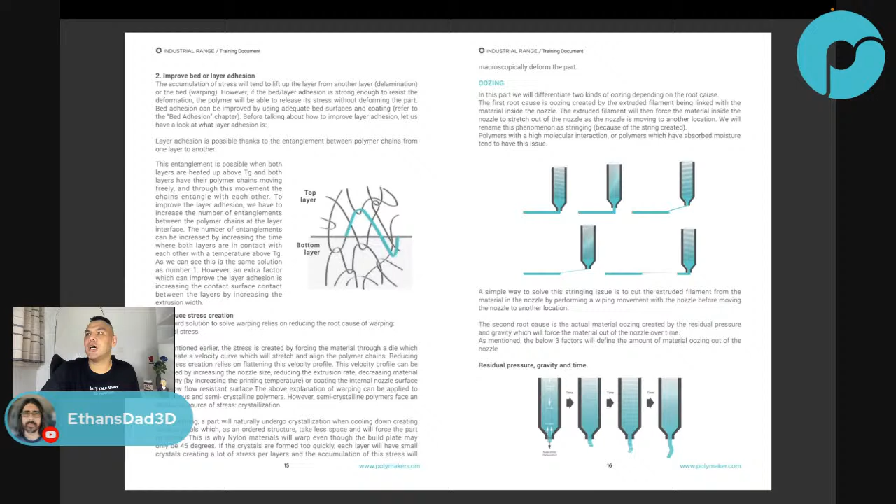Are we not printing at TM? No, Ethan, you are not. Because there's no TM, for example, if you're printing ABS or PC, there is no TM. You're not printing at TM. You are printing at a temperature that allows the material to be fluid enough to allow your printing, but nothing to do with TM.

Can you say it one more time? Okay. No, I meant I haven't heard about the crystallization. Okay, I was punching my printer. When is crystallization good or bad during printing? Okay, so let me explain one more time.

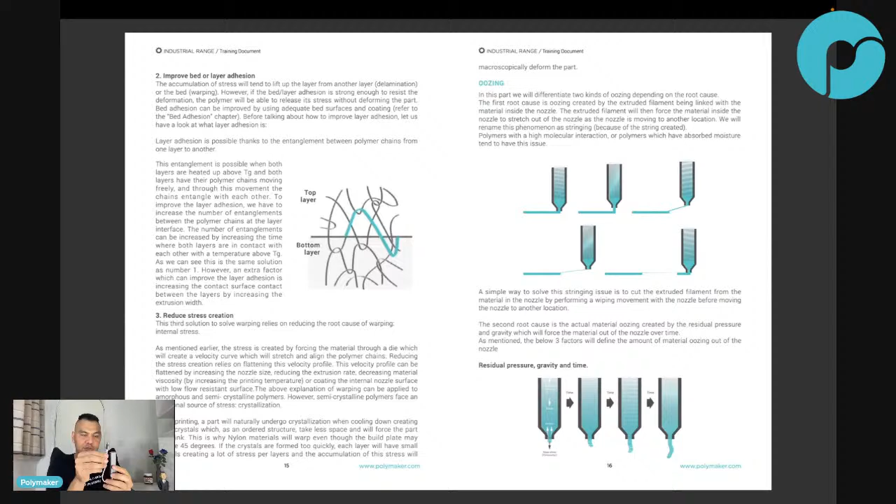You raise your temperature, then you arrive at TG. At TG, the polymers start to move, meaning they can start to deform. They have enough energy to deform. That's TG, the rubber state. Then you give more and more energy, and the more energy you give, the more they can move and crystallize, meaning they can align with each other, because they have special interaction with each other for semi-crystalline materials, and they start to align and create crystals.

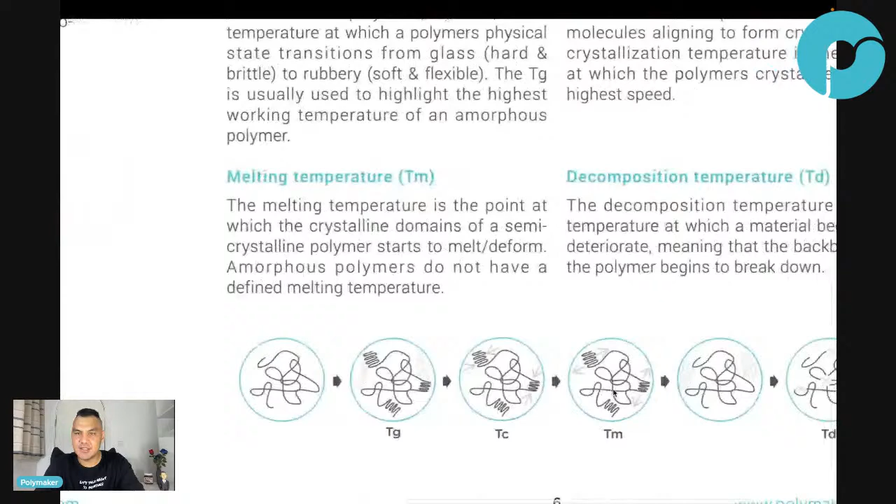If you go here, you see some parts starting to crystallize. But if you give too much energy, then they move too much, so they don't have time to stay in that ordered structure, and you break that structure because there's too much energy, and that's TM. So TG, TC, TM.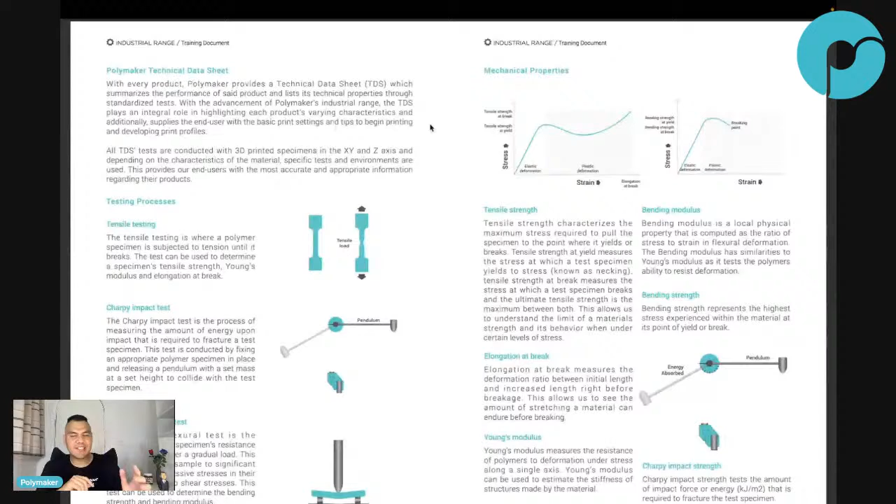So now that we know about crystallization, what's happening? Crystallization is an ordered structure for the polymer. So imagine a pack of spaghetti that is completely amorphous, a non-ordered structure, and then suddenly you align everything. When you align everything, you take less space. So when something is amorphous and then suddenly crystallizes, it takes less space. It's more dense. The crystals make the polymer more dense.

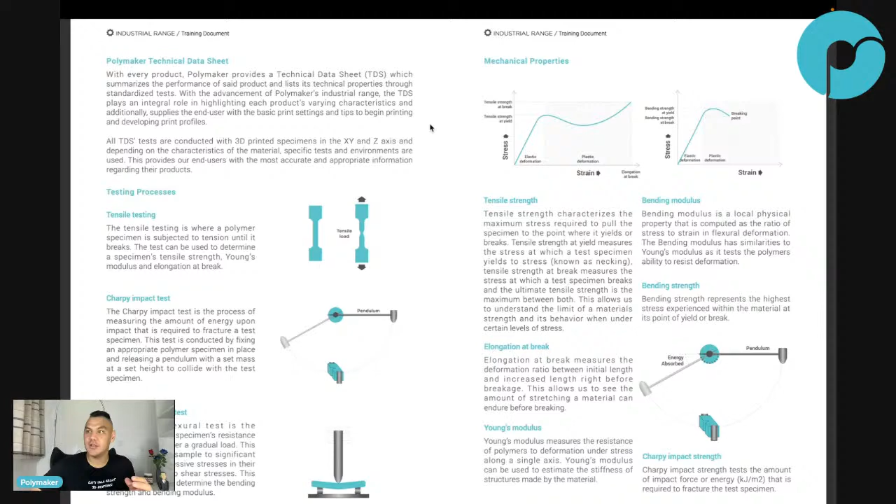That's why sometimes it changes colors, I think because the light refracts differently. But you get what I mean? So what does that mean? It means crystallization induces shrinkage. If you have something that crystallizes, it shrinks. You get me coming now? We're talking about shrinkage, talking about warping.

So that's happening. If you print nylon, each individual layer starts to crystallize, and it shrinks more and more, and then you add all these layers that are shrinking because they crystallize, and that's warping. And that's why nylon, PP, PEEK are very hard to print, these semi-crystalline materials, because of the crystallization process.

I'm late, so please excuse me if this has been covered. Isn't the energy in this case thermal? So the energy is ultimately heat? Yes, the energy is heat. There is one mechanical energy that comes from the stretching in the nozzle, but all the rest is heat.

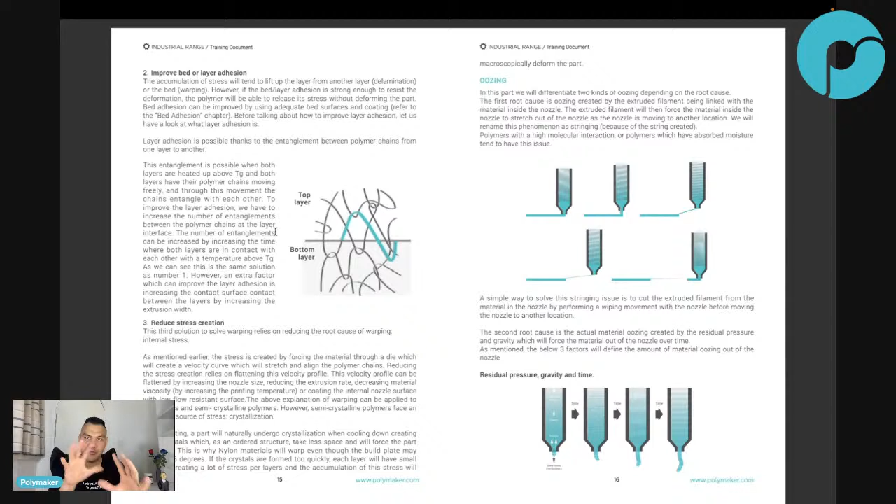So then it crystallizes when cooling down? Crystallizing doesn't matter if you cool down or heat up. The reason cooling down matters is because after you create the crystals, you need to continue cooling down so that you freeze these crystals. But if you heat up, you will also create the crystals, but then you will destroy them.

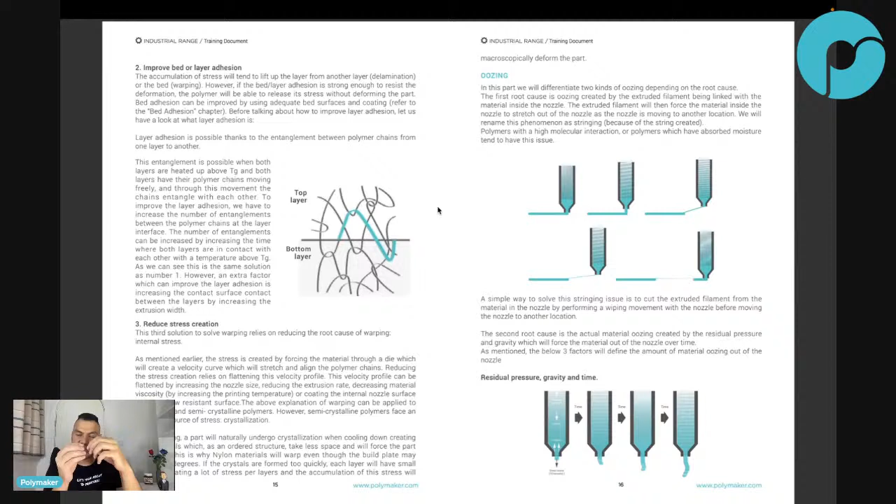But if you slow the crystallization rate, if the crystal develops very slowly, you can print more layers, and the crystals actually develop across the layers. It doesn't induce an accumulation of shrinkage.

So what is our warp-free technology? Why can you print our nylon so easily? Why can you print our semi-crystalline materials so easily? Because we found a way to control that crystallization rate.

When you print with our nylon, it's not going to crystallize as fast. That's why we also recommend annealing the part afterward, because maybe it didn't finish the full crystallization during the printing process, so you can finish that crystallization in the oven.

That's why there are two types of annealing. I always hear people talk about annealing for crystallization. But annealing is just heating up a part, and there are two reasons you would anneal a printed part. Reason one: crystallize your part, finish the crystallization process. Reason two: remove the residual stress we talked about.

When you print with PC, why do you anneal it? It doesn't even crystallize, so why anneal PC? Is it because of thermal expansion or thermal shrinkage? No. It's because you stress the whole filament during the printing process. So you anneal it to release the stress, bringing the whole part close to TG so that all the stress inside is suddenly released.

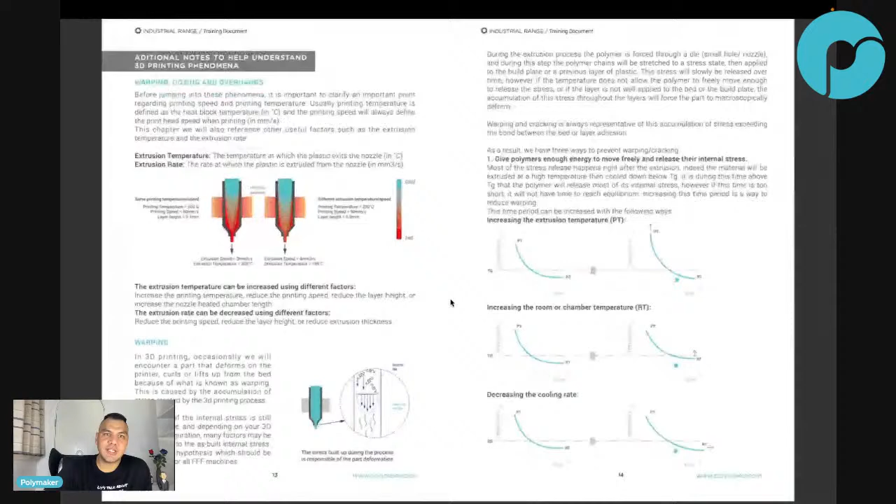Okay, great guys, I think we arrive at the end of part 2, but I don't think we are going to have a part 3. Part 3 was like a debate around the way I'm thinking about warping versus the way everybody else is thinking about it, but we kind of debate at the same time. Any question that you have, I think I explained more or less what I wanted to explain. And this one, like I said, improved bed layer adhesion, I think you guys already know. Maybe only my way of explaining this is different, but the result is more or less the same.

Missed most of the lecture, I was watching the football. Football is more important, yeah, of course.

So after 3 hours of discussion, what is the net result of everyone's collective work, and how to avoid warping? Switch to Polymaker filament. So what do you guys think?

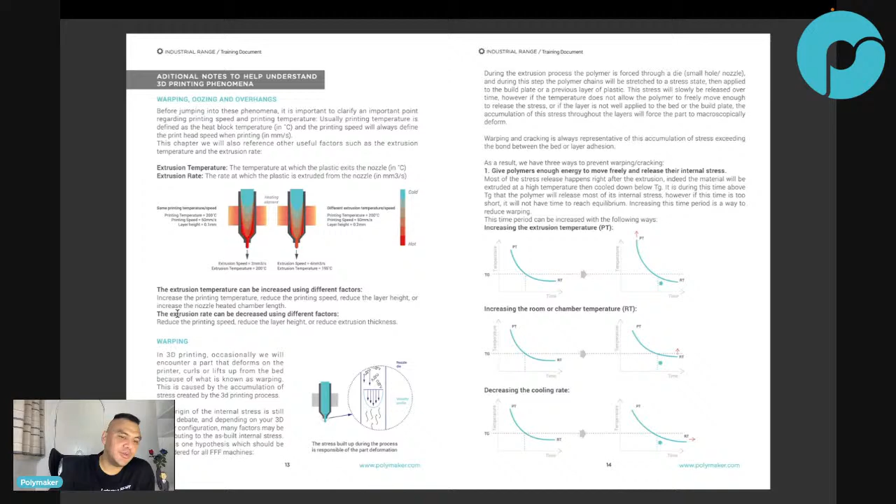Let me know, is it like you think I'm crazy, like this doesn't make sense, and the thermal shrinkage makes much more sense? Or okay, maybe I have a point, maybe I'm onto something, and maybe you are willing to change, willing to rethink, or you think, wow, this is really logical, it makes a lot of sense. Where are you in the spectrum?

I think we may have read the same paper. I've seen shrinkage explained due to stretched polymer chains. I don't know which paper you read, but if you can share that paper with me, because I've been looking for papers with the same point of view as I have. I learned this from here at Polymaker, I didn't learn it from papers. I wish I would, because then I'd have at least someone to rely on, a paper or a video.

I'm going to have to watch the upload, I only caught the tail end but it was interesting. Great, I think it's a combination of what you say and thermal shrinking too. Okay.

Well, it's great, at least I make you think. That was my goal, my goal was not to convince you completely, my goal was more to make you think.

So annealing is to finish crystallization. I heard it's also used to remelt the part, which could help cure those microcracks. Yes, if you remelt, then you can cure the microcracks. Annealing is also to crystallize, and it's also to release the stress.

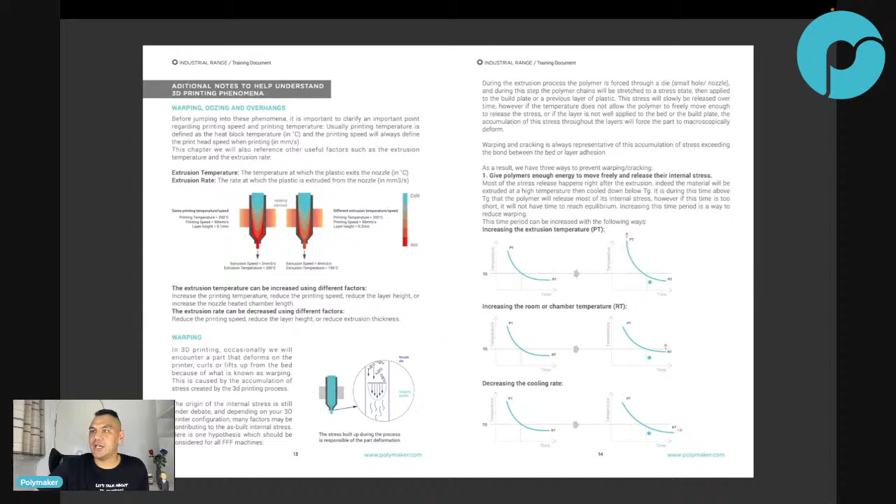Yes, printing temperatures, yes, my tech fan. In my opinion, if you print at a higher temperature, it will improve warping. Increase the extrusion temperature, not the printing temperature, extrusion temperature. I mean, you can increase extrusion temperature with printing temperature, right? But there's other ways, like printing slower, for example.

I'm printing a car jack in PC, and I used all of this knowledge in order to make it. Where is it? I printed a car jack, let me check.

Polymaker Nicholas, maybe. Or car jack. Where did I put that video? Oh, there you go.

So I printed this with everything I said today. It's very hard to print a strong PC. Yeah, it's very good, yeah.

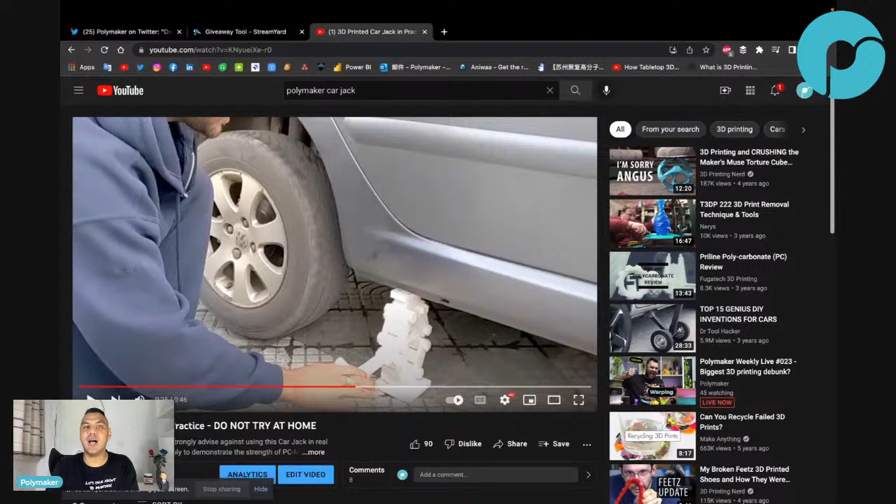100% infill? No, I think it was 95 or something like this. Nobody should do this. By the way, nobody... well, I was about to say only professionals, but I'm not a professional. But don't do that, don't use a 3D printed car jack to change your wheel, never. That was simply a marketing video which we never actually shared as advertisement, just put on our YouTube channel. It was just to show off the strength a little bit. By the way, if you check that video, you'll understand, guys.

There's so many things to talk about. If you're interested in modified PLA, how to make something that doesn't break, you should check that video. Why our PLA is not breaking, like he's putting it through everything and it's not breaking, only deforming. But anyway, I'm going off topic.

At least wear safety glasses. Yeah, that time I think I was only 3 years into 3D printing, and I already tried to challenge a lot of things. I challenged the whole thing. People were thinking a 3D printed car jack, no way? And I was like, really? Are you sure? Then one of our partners designed a car jack, and I said, give me that car jack, let me see if I can lift the car with it.

I get warping with eSUN PLA Plus unless I use a brim. Try to use what we explained today.

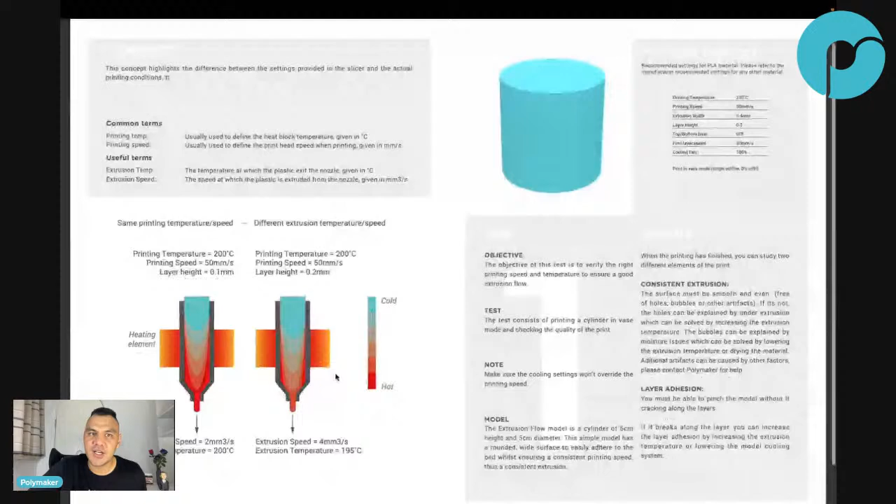I designed a profile creation process that's completely different from what people are doing. Like when you design your profile, you do these things, and then I designed a 5-step process, like how scientifically you can do your flow stuff, explaining it. First I have a test and the concept, and then I have to go further.

Something with Zombie Hedgehog about calibration that apparently people aren't seeing as it should be seen. There's another thing about PLA Plus - a lot of people think PLA Plus is stronger and stuff, so I developed a chart and stuff to explain. I have a lot of voices about warping. Yeah, sorry, I have a lot of things, guys.